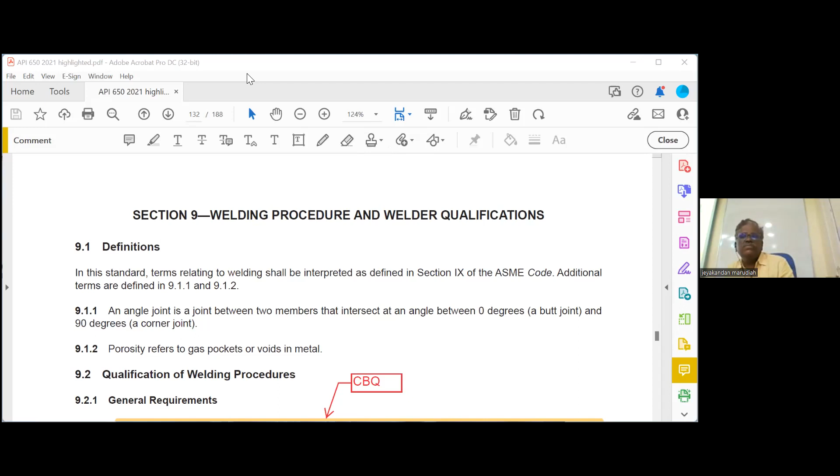The erection manufacturer and the fabrication manufacturer, if other than the erection manufacturer, shall prepare welding procedure specification and shall perform test documents by procedure qualification to support the specification as required by section 9 of the ASME code and any additional provisions of the standard. So if they ask an exam question, as per which standard do we qualify procedures: section 9 and 650. It is not only section 9, we have to follow any additional requirements of 650 also, because 650 has some additional requirements.

Now this one also important. Welding procedure for ladder and platform assemblies, handrails, stairways, and other miscellaneous assemblies, but not their attachment to the tank, shall comply with AWS D1.1, AWS D1.6, section 9 of the ASME, including the use of standard WPS. That is important. Suppose it is not attached with the tank, only the handrail, or we can have platforms which are not directly attached to the tank, you can use D1.1 or D1.6 also.

Now, in ASME section 9, there is a P number and a group number. What is the P number? It is a grouping of base metal, based on chemical composition, weldability, and mechanical properties. And the group number within the P number, for example P number 1, we have 3 group numbers: 1, 2, 3.

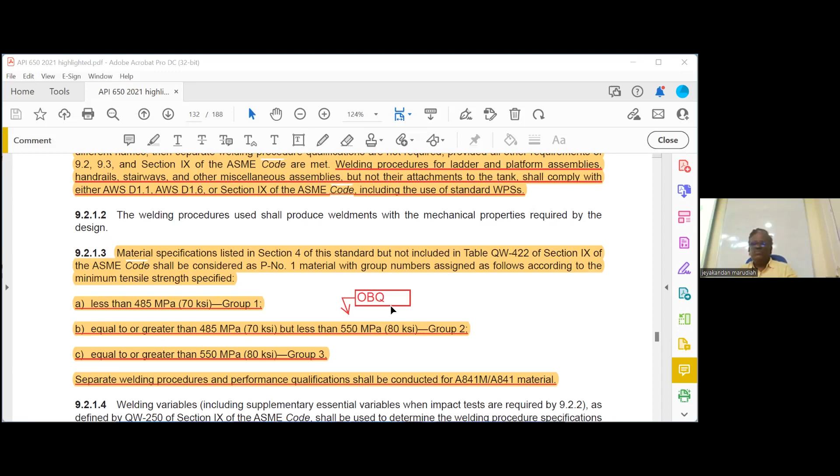This is important: material specification listed in section 4 of the standard but not included in table QW-422 of section 9 shall be considered P number 1. If it is here but not in section 9, take it as P number 1 because all are carbon steel, with the group number assigned as follows according to minimum tensile strength. Less than 70 KSI, we take it as group 1. Equal or greater than 70 KSI but less than 80, group 2 — that is an open book question. Equal or greater than 80 KSI, we take group 3.

And separate welding procedure and performance qualification shall be conducted for A841M, A841 material. Suppose you want to use A841, there is no P number group, we have to make a PQR only for that material. It is not allowed to do otherwise. Is it clear?

Now, sometimes what will happen?

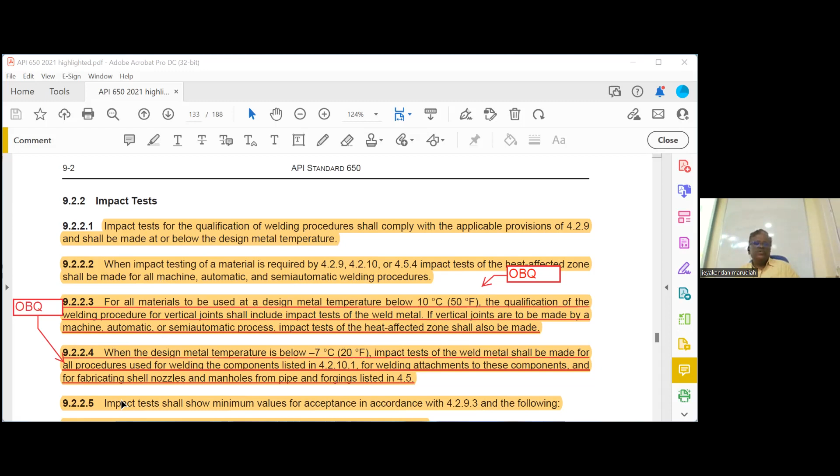The qualification of welding procedure for vertical joints shall include impact test of the weld metal. If vertical joints are made by automatic machine, impact test of the heat affected zone is also open book question. When the design metal temperature is below 20 degrees Fahrenheit, impact test of the weld metal shall be made for all procedures used in the welding. So if it is less than 20 degrees Fahrenheit design temperature, for all procedures, whether horizontal or vertical weld, we have to do impact test - this is only for procedure impact test.

Now what value do you have to use? Impact test shall show minimum values for acceptance in 4.2.9.3 and following. For P number group 1, we have to take for PQR this value of 15 foot-pounds average of 3. For P number 1 group 2, it's 20 foot-pounds. For P number group 3, it's 25 foot-pounds. We have to take this; we will not follow those other values. For procedure, we have to follow this PQR table.

For plates thicker than 40mm, 1.5 inch, this value shall be increased by 5 foot-pounds every half an inch - over interpolation, for interpolation averaging we can do. For example, if we take P1 group 1, what is the average required? 15 foot-pounds, but this is applicable only when thickness is 1.5 inch or less. Suppose your thickness is 2 inch, so every half an inch how much do you increase? 5. So 15 plus 5, that should give 20 foot-pounds value. That is the meaning of this.

From an exam point of view, this is not important. The exam never asks this, so leave it.

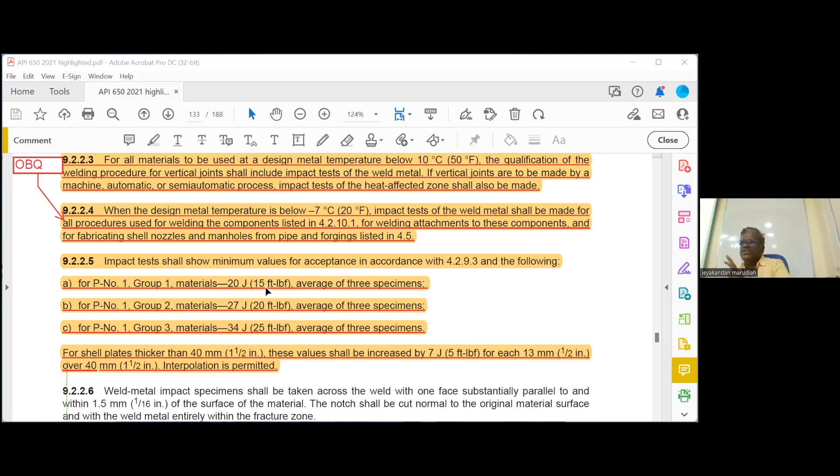Okay, highlight this one, 9.3A. Each welder or welding operator shall be assigned an identified number, letter, or symbol by the fabrication or erection manufacturer. That is important, so every welder should be given an identification number.

Now highlight B. The fabrication or erection manufacturer shall maintain a record of welders or welding operators employed that shows the date and results of the test for each welder and the identification mark assigned to each. The record shall be certified by the manufacturer and accessible to the inspector. So you have to maintain traceability of which joint is welded by which welder.

Then where do we write the welder number on the tank? On the tank, every 3 feet it should be hard stamped. Suppose hard stamping is not allowed due to some service condition, you can write it with paint also.

The welder or welding operator's identification mark shall be stamped either by hand or machine on all tanks. The mark shall be at intervals not more than 3 feet along the following welds, liquid containing, including all openings. So every 3 feet you have to stamp it. The 3 feet is a closed book question.

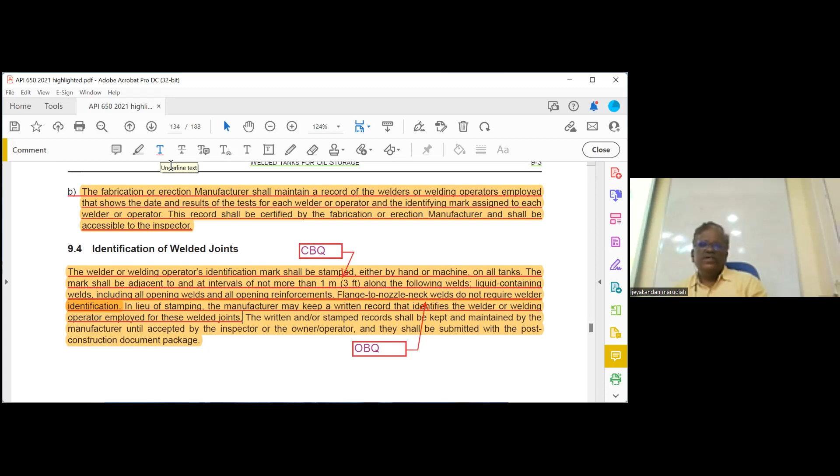Marking again may be one question only. So all storage tanks should have a nameplate. What are the details on the nameplate? What should be the letter size on the nameplate? Minimum 4 millimeter, minimum 5 by 32 inch, or 4 millimeter.

Now change it to 4. The nameplate shall include means of letters, number not less than 4 millimeter, 5 by 32 inch. That is a closed book question. So this is the nameplate information.

Then please go to the next page. Regarding PWHT, if the nameplate shows SR1, that means only flush type clean out fittings were post-weld heat treated. SR2, flush type clean out.

I told you group 1, more than 1 inch thickness or more than 12 inch nozzle, we have to do PWHT when the thickness is more than 1 inch. Group 4 to 6, more than 2 inch diameter nozzle, we have to do it. Highlight this one.

Use SR1 only for flush type clean out fittings and flush type shell connections that have had thermal stress relief. This is an open book question. SR2: when thermal stress relief has been performed on flush type clean out fittings, flush type shell connections, and shell openings NPS 12 and greater in size in shell plates, insert plates, or thickened insert plates.

SR3 is for group 4 to 6, NPS 2. SR4: all flush type clean out, all flush type connections, and the shell openings. SR5: complete tank, if you are doing the complete tank PWHT it is SR5. None means there is no PWHT on the tank.

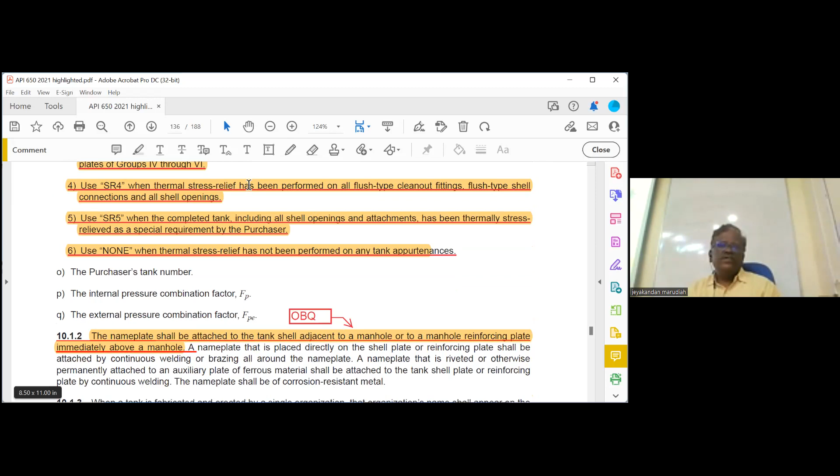Then certification. Who will certify the tank? He has to produce a certificate, the manufacturer. The manufacturer shall certify to the purchaser by a letter such as shown in figure 10.2 that the tank has been constructed in accordance with applicable requirements of the standard. So this is the certification letter he has to give, manufacturer certification letter. To the address: we hereby certify that the tank constructed for you at the location described, serial number, contract number, meets the application of 650 dash edition dash division. So manufacturer should certify. Okay.

So again, who will certify? The manufacturer shall certify to the purchaser by a letter such as shown in figure 10.2 that the tank has been constructed in terms of the applicable requirements.

That's all for chapter 10. Now we will go to Annexure A, optional design basis for small tanks. Annexure A may be one question. Again, Annexure A is revised now from the previous edition.

So when can you use Annexure A? If you are fabricating a storage tank as per 650, and if the purchaser or owner wants you to fabricate as per Annexure A, you can go for it. What are the conditions you have to follow when using Annexure A? Condition number 1, maximum shell plate thickness allowed is 1/2 inch. If you are fabricating as per main code, there is no limit, no thickness limit. What is the maximum shell thickness allowed as per the main code?

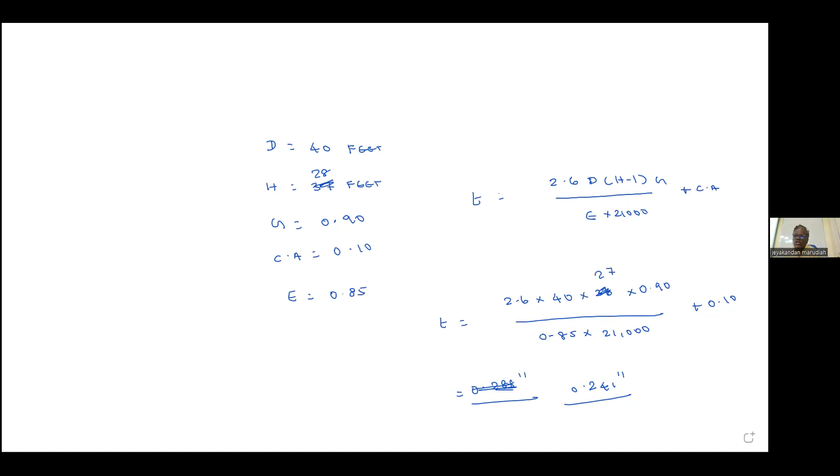We can find out what is the capacity of the tank. Capacity means, suppose I have a storage tank. For example, let us take diameter and fill height. What is the diameter? Just tell me. 40 feet, okay. So height, the design liquid level, 28 feet. Okay, same we will take, because 28 minus 1 we took as 27.

Now, how many barrels of oil can we fill in this tank? The capacity formula is 0.14 D squared H. This is the capacity for any tank. Just calculate it: 0.14 D squared H. I will show you, no problem. Just calculate it.

So what answer are you getting? Six thousand two hundred seventy two barrels. You can fill this tank with this. This is the capacity of this tank.

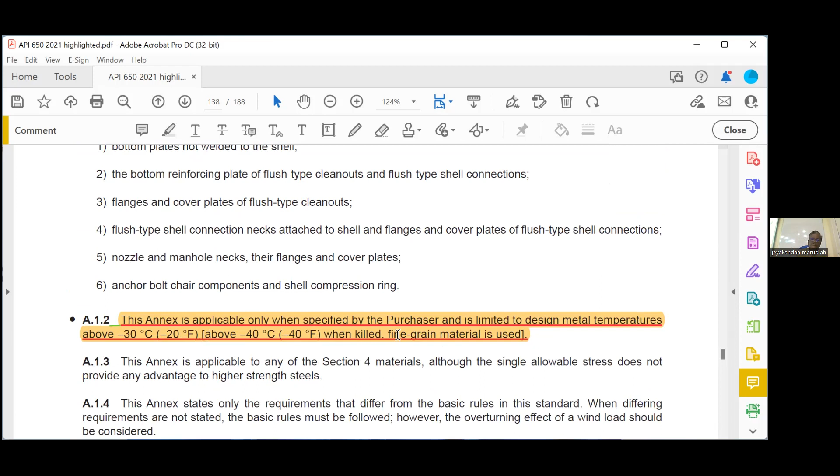Highlight A12. This annexure is applicable only when specified by the purchaser and is limited to design metal temperature above -20, and above -40 when killed fine grain material is used. Generally, above -20 only we have to use Annexure A, and if you are using fine grain practice, above -40 we can use it.

Please go to the next page. We will skip A1A and go to A1B. A1B, typical sizes, just mark it as open book.

Corresponding nominal capacities in barrels for tanks with 72 inch courses. So 72 inches means each shell course has 6 feet. If you are using Annexure A, it is allowed to use only the shell course height either 6 feet or 8 feet per each shell course.

Minimum number of shell courses: this is the tank height and the number of shell courses. Suppose one shell course is 6 feet, what will two shell courses be? 12 feet. 3 shell courses, 18. 4, 24. Just multiply by 6. 5, 30. 6, 36. 7, 42. Up to 10 courses you can go as per this Annexure A.

If you fabricate under Annexure A, you must use either 6 feet or 8 feet course height, that's the standard. If you are going for original code, there is no restriction, but for Annexure A, either the course height should be 6 feet or 8 feet. For 8 feet there is a separate table.

Now how to calculate the barrel? Suppose I have 6 shell courses, that means height will be 36, and my tank diameter is say 40. It will hold 8060 barrels, that is 8060 barrels. There is a formula here: C equals 0.14 d squared h. Using this formula only, the table was done.

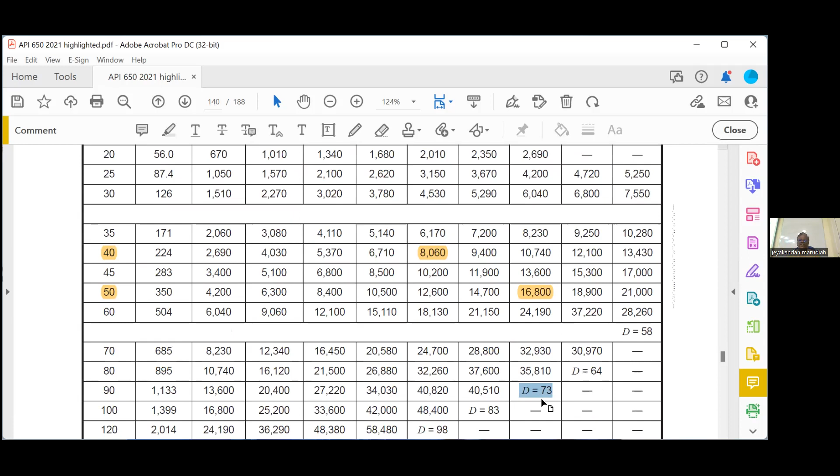These details are not important for the exam, Annexure A may have rarely one question. Height is based only on design liquid level, always design liquid level.

Then we'll go to the next one, A2B. This is the 96 inch, that means 8 feet shell course. 2 courses, 16. 3, 24. 4, 32. 5, 40, like this. The formula is the same here also: C equals 0.14 d squared h.

Then please go to A-6 design. The maximum tensile stress before the joint efficiency factor is applied is 21,000. That is important, a closed book question. If you are using Annexure A, you have to take the stress as 21,000.

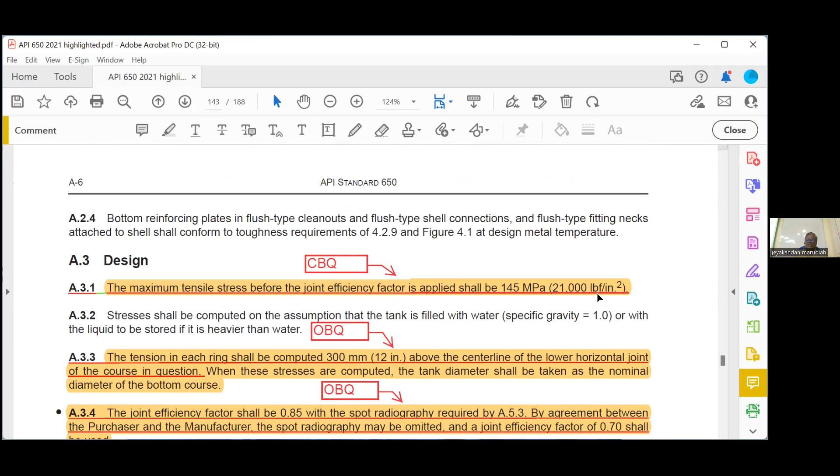Tension is calculated 12 inches above the center line of the lower horizontal joint of the course in question. This is the same 1 foot formula, that's why we use H-1. That is an open book question: 12 inches, 1 foot above the horizontal joint of each shell course we are taking.

Then highlight A34: the joint efficiency is 0.85 with spot radiography as required by A.5.3, or if spot radiography is omitted, the joint efficiency of 0.7 shall be used.

Yes, maybe one question. Yeah, annexure A, it will mention in annexure A.

That's all annexure A. Sir, now we will go to A3.3. How do you mention that it's the 1 foot formula? They are mentioning it as 1 foot, sir. See, the formula is given as H-1.

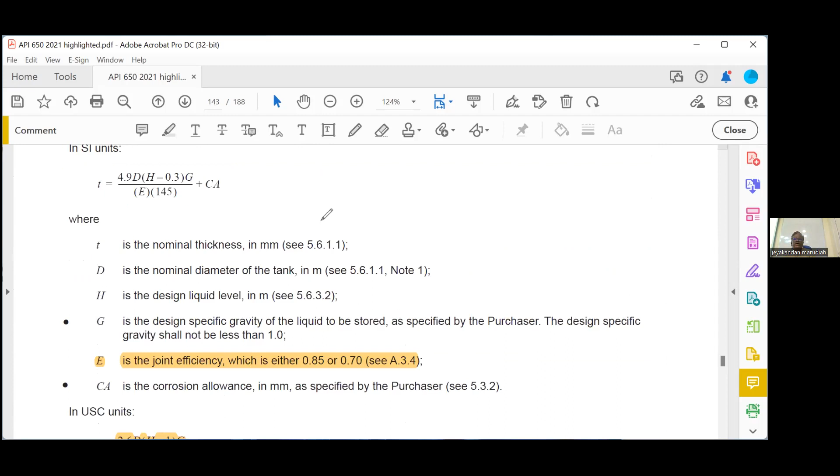Yes sir, you can see here why it is H-1. Any horizontal, for example, your tank height is say 28 feet design liquid level. When you are calculating the bottom course, we are taking 27 feet.

See what you are using in the formula is H-1. That is 27 feet, meaning we are taking from here to here, the design liquid level, 1 foot from the bottom joint only. That's why it is called the 1 foot formula.

If you take the second shell course, again 1 foot from this joint. Third shell course, 1 foot from the joint. Everywhere H-1 means it is a 1 foot formula - height minus 1 foot. That is the 1 foot formula.

Okay sir, okay sir, okay. Thanks.

Now we will go to annexure B, recommendation of design and construction foundation of above ground oil storage tanks.

It's not very important, just one line. Highlight B3.3, B-3.

See, annexure B, I think some pages are missing in the printout, but if we correct it, we will give you the soft copy. We'll include it in the soft copy because there was some editing mistake, but there is no question on the missing pages. Okay, but we will give you the soft copy, corrected.

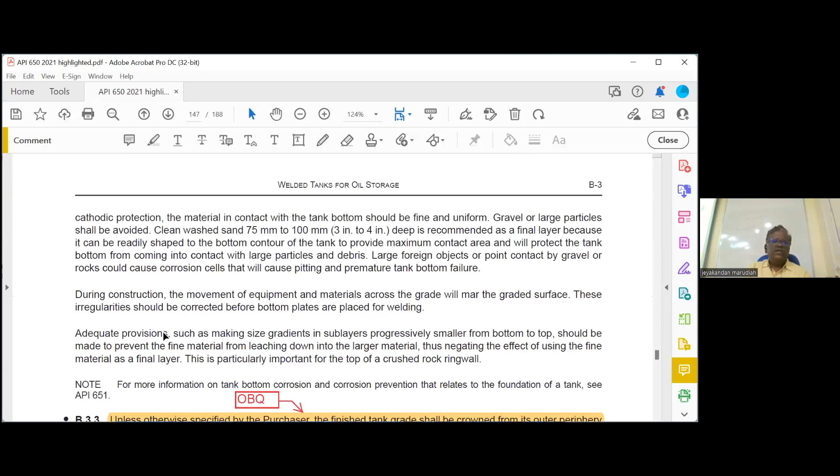Then highlight this one: unless otherwise specified by the purchaser, the finished tank grade shall be crowned from its outer periphery to its center at a slope of 1 inch in 10 feet.

Okay, tank grade means tank level slope, because we have seen the bottom plate slope is 1:120. For that you have to make a grade also. Grade means the concrete - if you are using concrete or soil, that should be in slope.

See B1.1, about this recommendation of design and foundation - we talk about the foundation. Okay, there is a printing mistake, some 2 pages missing, but we will include it in the soft copy and give it to you.

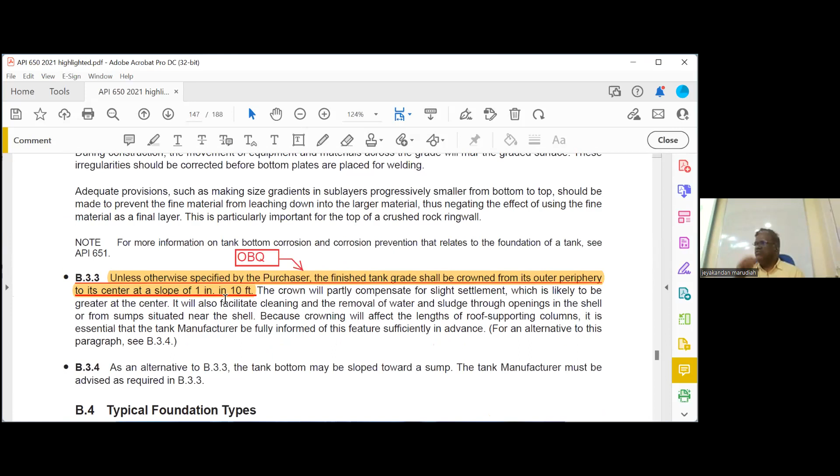So this is what should be highlighted - what should be the slope if they ask in open book. Unless otherwise specified, the finished tank grade shall be crowned 1 inch in every 10 feet slope. You have to maintain a foundation slope - this is a foundation slope, and there we have seen the bottom plate slope.

Then what are the foundation types? Earth foundation without ring wall - a satisfactory earth foundation should accomplish the following: provide a stable plane to support the tank. What is the purpose of the earth foundation? Without a ring wall, this should be the condition of the foundation.

Limit overall settlement of the tank to a value compatible with the allowance. Provide adequate drainage and not settle excessively at the perimeter - it should not settle excessively. Just highlight it, maybe open book.

Then earth foundation with a concrete ring wall, B4.2. Highlight this one also: large tanks and tanks with heavy or tall shells that are self-supported roof impose a substantial load on the foundation under the shell.

Okay, so when you have a self-supported roof, the total roof weight will be on the shell, because the shell will have what you call girders. There are no columns - self-supported means there is no column. The entire roof weight will be on the girders and the shell will hold the load.

This is particularly important with regard to shell distortion in floating roofs. When there is some doubt whether the foundation would be able to carry the shell load directly, a concrete ring wall foundation should be used. For self-supporting roofs, you have to use a concrete ring wall because soil will not withstand that much load.

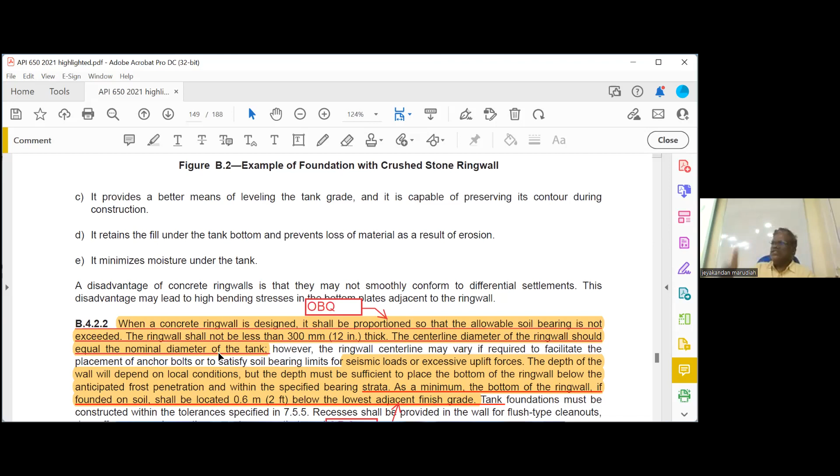Should be at least 1 foot, 12 inch, 1 foot thickness. The center line diameter of the ring wall should be equal to the nominal diameter of the tank. Generally the shell should sit at the center of the ring wall.

Then seismic loads - highlight this one: as a minimum, the bottom of the ring wall, if founded on soil, shall be located 2 feet below the lowest adjacent finished grade. Okay, 2 feet below the adjacent grade for the bottom of the ring wall.

Highlight this one, open book. Wherever we mark it, we covered it in your question bank. That's why we mark it. That's all.

No, we have 2 more. Annexure C is very important, and H is important. Generally there are two questions in Annexure C, two questions in Annexure H. Annexure C is external floating roof, Annexure H is internal floating roof. For floating roof, there will be at least 3 to 4 questions.

Please remember, if they ask any question regarding floating roof construction, you have to refer only to Annexure C. Generally these will be open book questions. Don't try to search in the main code. The main code doesn't discuss anything about external floating roof, we generally discuss about common roof. Any question asked about floating roof, at least one question will be there in the exam. You have to search in the annexure.

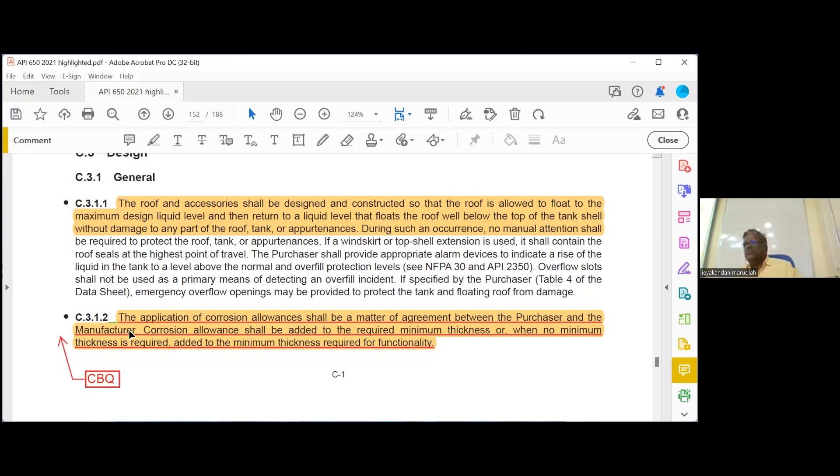Next, what should be the thickness? Sleeve and fittings on the single deck, annular pontoons and lower deck shall have a minimum thickness of 6mm for all pipe and plate construction. So the fittings should have minimum 6mm thickness - that is an open book question. Generally what is the thickness of the roof? 5mm, that is applicable to floating roof also. Roof will be 5mm, but all fittings should have minimum 6mm.

Then shunt - what is the purpose of shunt? Shunt is a conductor, an electrical conductor.

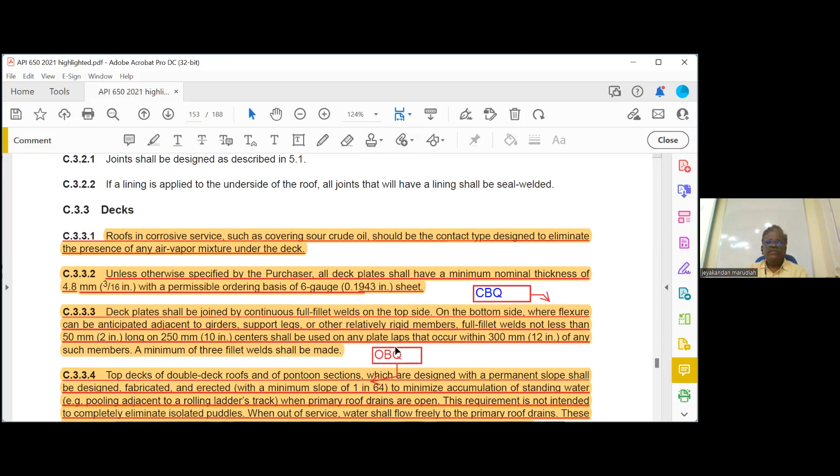So if you take the plates, one side will be a continuous fillet weld, the top side. The bottom side will have a stitch welding, not a continuous weld. What is the stitch welding? It will be a 2 inch long weld for every 10 inch - just a 2 inch stitch we have to weld. This is for the floating roof.

Then what should be the slope of the external floating roof? 1 inch in 64. So I told you, for floating roof, we have to take the radius and make a slope. Highlight this one: top decks and double deck roofs of pontoon type which are designed with a permanent slope shall be designed and fabricated with a minimum slope of 1 inch in 64 to minimize accumulation of standing water when primary roof drains are open. This requirement is not intended to completely eliminate isolated puddles. Okay, that is important.

Then pontoon design. Now suppose, see how a floating roof will be there. Okay, so this is the external floating roof.

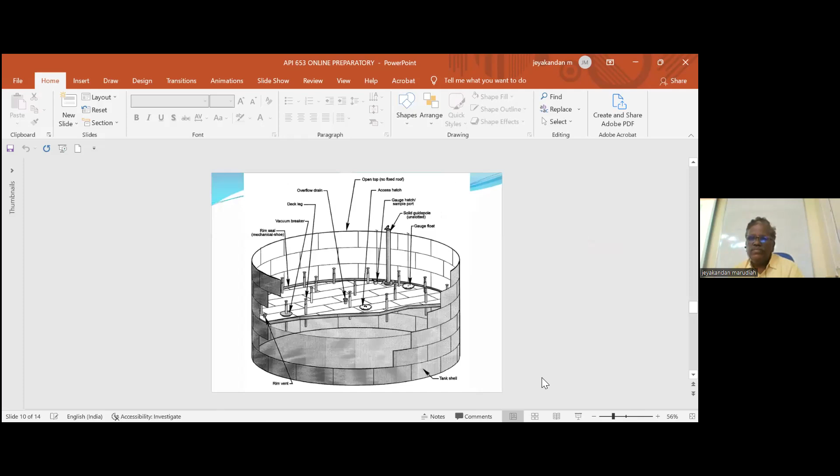Then this is called a pontoon - pontoon of the box type. This is a single type, you can see only one plate, that also will have the roof drain. Now suppose the roof drain is not operating.

This is the internal floating roof. Internal floating roof - we have a fixed roof and there is a floating roof piece. Internal floating roof, there will be a fixed roof and a floating roof. And this is how the drain is working. This is the seal, the actual seal. So I told you the top one is called the secondary seal, the bottom one is called the primary seal.

Okay, now what is the requirement? Suppose the drain is not operating, the drain is plugged, the drain is blocked. Then what will happen? The rain will collect on the roof. So what does the code say - how much load should the roof withstand without sinking? So this is the requirement.

A 10 inch rainfall - rainfall is measured today in centimeters, so they will tell it in inches or centimeters. A 10 inch rainfall in a 24-hour period over a full horizontal tank with the roof intact. Even if there is a 10 inch rainfall for a continuous 24 hours, the roof should not sink - it should withstand that much weight of water. That is the design condition.

So highlight this one, open book question: this condition does not apply to double deck roofs provided with emergency drains designed to keep water to a lesser volume that the roof will safely support.

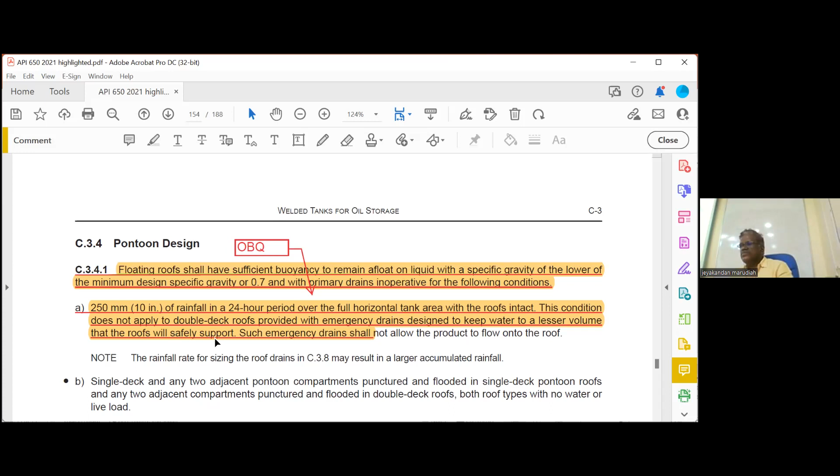Then pontoon openings. Each compartment shall provide a liquid tight manhole with a minimum size of NPS 20. On the pontoon compartment box circle, we should have a manhole, and the main roof also we should have a manhole. So the pontoon compartment manhole should be minimum NPS 20. That is an open book question.

Then please go to the next page, ladders. Generally the roof will have rolling ladders, flexible ladders. Now how much should the rolling ladder withstand? At the midpoint, it should withstand at least 1,000-pound force or 4,450 Newton.

So highlight this one. The ladder shall be designed for full roof travel, regardless of the normal setting of the roof leg supports. The ladder shall have full length handrails on both sides, and it shall be designed for 1,000-pound force midpoint load with the ladder in any operating position. That line is open book. It should withstand 1,000-pound force midpoint load in any operating position. That is an open book question.

Now highlight this one, primary roof drains. What should be the size of the roof drains? Highlight the first, second, third, fourth, fifth line. A swing type check valve shall be provided at the inlet of the drains of single deck roofs to prevent backflow of stored product if leakage occurs.

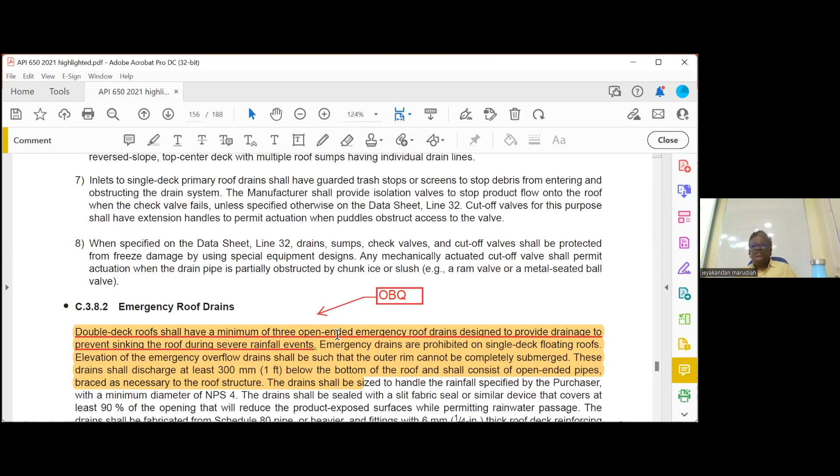Now primary seal, highlight this one. Section 13.13.5: The type of primary seal may be controlled by jurisdiction regulation. Types generally used are mechanical shoe seals and liquid mounted seals. So primary seal is the bottom one, generally mechanical shoe type seals.

Secondary seal: the type of secondary seal may be controlled by jurisdiction. If required by the purchaser, a secondary seal shall be provided by the roof manufacturer as specified.

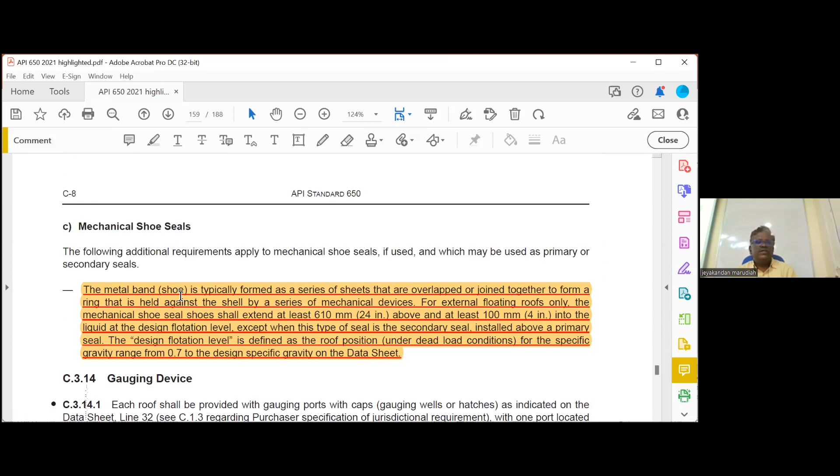Then mechanical shoe seals. What is a mechanical shoe? Highlight this one. The metal band is typically formed as a series of sheets that are overlapped or joined together to form a ring held against the shell by a series of mechanical devices. For external floating roofs only, the mechanical shoe seal shoes shall extend 24 inch above and at least 4 inch into the liquid. That is not important.

I think that's all. Do we need to mark the mechanical shoe seal or not, sir? No need.

Go to C10. This is important, last one, C4.5. Drain pipe and hose systems of primary drain shall be tested with water at a pressure of 50 pounds per square inch gauge, so let us check whether the drain line has any leakage. During the flotation test, the roof drain valves shall be kept open and observed for leakage of the tank contents into the drain lines.

So any leakage in the pipe, we have to check the drain lines. What happens if the drain line is leaking? There are two possibilities: one is oil can mix with water, or even water can mix with oil. Both possibilities are there. That's all annexure C.

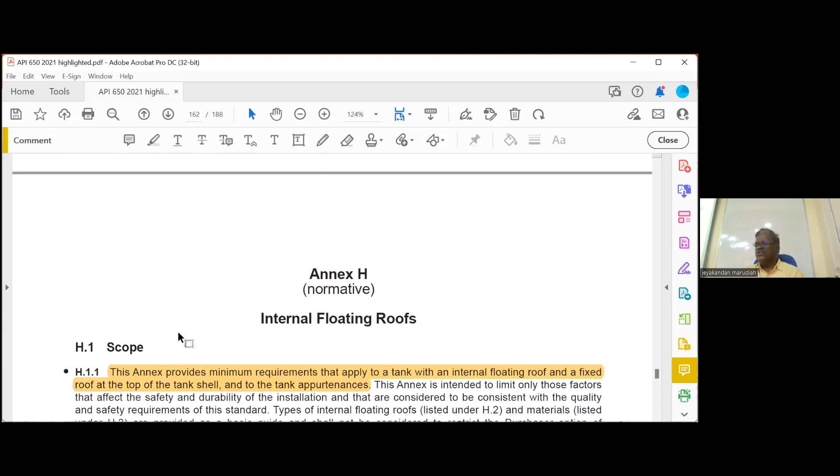Then we'll go to annexure H, internal floating roof. Generally external floating roof is important, generally 2 questions are asked. Here maybe 1 question, very rarely. Highlight this H21: The internal floating roof type shall be selected by the purchaser in consideration of both the proposed and future product service, operating condition, maintenance requirements, regulatory compliance, all these things.

Next, page number H2, H3.2: steel, same thickness only. Steel shall conform to the requirements, then we should have 3/16 inches minimum thickness.

Now, when you are using the internal floating roof, the fixed roof can be made of aluminum sheet also. That is allowed, fixed roof you can use aluminum also. Okay, highlight all types.

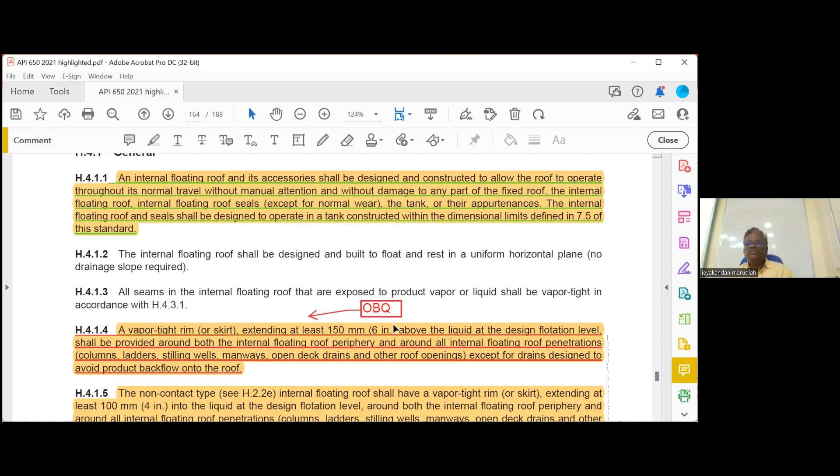H414: A vapor tight rim or skirt extending at least 6 inches above the liquid at the design flotation level shall be provided around both the internal floating roof periphery and the internal floating roof penetrations, except for drains designed for. So you should have a vapor tight rim. What is the seal? Vapor tight rim should be at least 6 inches above the liquid level. It should be there. Open book question.

Then this is important. Page number H421: All internal floating roof design calculations shall be based on the lower of the minimum design specific gravity or 0.7, regardless of any higher specific gravity specified by the purchaser. When you are calculating thickness, you have to use 0.7. Suppose your stored product specific gravity is less than 0.7, you have to take the value. Maximum allowed is 0.7.

Then this is important, page number H5, last paragraph. Only austenitic stainless steel hardware shall be used to join aluminum and stainless steel components to each other or to carbon steel. That is important. When you are joining aluminum to carbon steel, we have to use a bolt/nut made up of stainless steel. Where acceptable to the purchaser and manufacturer, aluminum hardware may be used to join aluminum components. Aluminum shall be isolated from carbon steel by an austenitic stainless steel spacer, elastomeric pad, or equivalent protection. The use of plated fasteners shall be permitted only when components allow. Generally, when joining aluminum to steel, we have to use stainless steel. That is an important point.

Then peripheral seals, page number H. This is highlighted, almost same as before. H441: When an internal floating roof has two such devices, one mounted above the other, the lower is the primary peripheral seal and the upper is the secondary peripheral seal. Where there is only one such device, it is a primary seal, regardless of position. When you have two seals, upper one is called secondary, lower one is primary. When you have only one, that is primary.

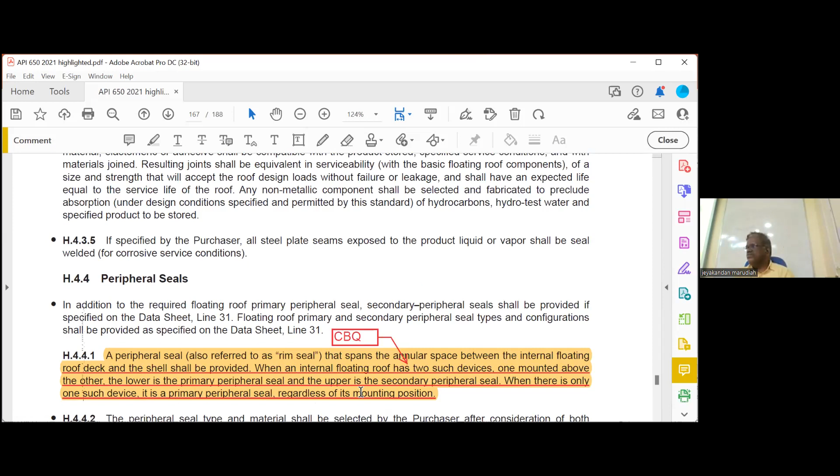Then what type of seal material do we have to use? This is open book question. For crude oil, the seal material should be made up of this material, sealing. And all peripheral seals and their attachment to the floating roof shall be designed to accommodate plus or minus 4-inch local deviation between the floating roof and the seal. That is open book.

Even if you do not understand, no problem. Just read the question and answer.

Then this is very important, recently asked in the question. All fasteners and washers for insulation of seal joints, including fabric, shall be austenitic stainless steel. That is important. When you are using seal joints, you have to use only austenitic stainless steel. Fasteners means bolt, nut, washer—you have to use austenitic stainless.

Then penetration, H45: columns, ladders, and other rigid vertical appurtenances that penetrate the deck shall be provided with a seal that will permit a local deviation of plus or minus 5 inches. That is open book question.

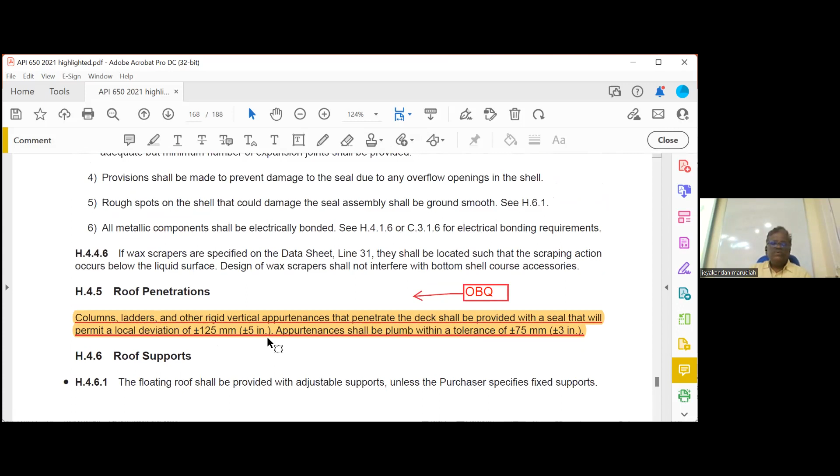Highlight this one, tank circulation vents, page number H10. Peripheral circulation vents shall be located on the tank roof and meet the requirement 553, so they are above the seal. And for internal floating roof, the maximum spacing between vents shall be 32 feet.

So suppose you have a bench, every 32 feet you should have a bench. Yesterday also we have seen one 32 feet. What was that 32 feet yesterday? Settlement, every maximum 32 feet.

Then manhole, page number H-11: At least one fixed manhole complying with the standard, with a nominal opening of 24 inches or larger, shall be provided in the fixed roof for maintenance ventilation purposes. If used for access to the tank interior, the minimum clear opening shall be 30 inches. Suppose you want to go inside, then you should have a 30 inch opening.

That's all. Then H, Annexure I—these are not important.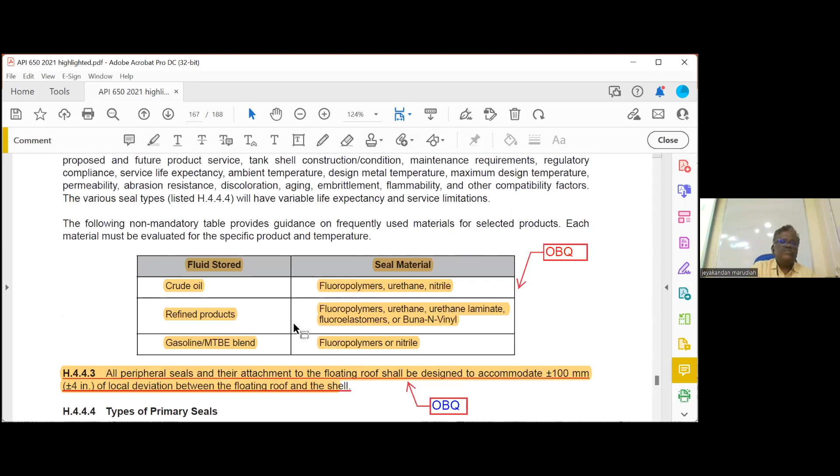Only one paragraph is important.

So I-2. The permeability of leak detection barrier shall not exceed 1 into 10 to the power minus 7 cm per second. Just to highlight this one. I2, page number I2, D, point number D. Highlight this one, mark it as open book. Leak detection barrier.

See, what is leak detection barrier? You can see the sketch here. Suppose this is our tank bottom, this is our sandbag. They will insert some pipes here. Even concrete, they will have some pipe. Purpose is, if the bottom is leaking, the leakage should be immediately collected outside.

There are two reasons. One, you should know immediately that the bottom is leaking. When the leakage comes outside only, you should know. But if it is inside here, it will spread. It will damage the foundation. It will damage the bottom also. So that is called a release prevention barrier, RPB.

Next to 653, we will discuss about the RPB. Release prevention barrier means it should channel. Channel means it should bring back immediately to the outside. Any leakage in the tank leaking, the inspector should know it immediately there is a leakage. It should come outside. How it will come outside? You should have pipes everywhere.

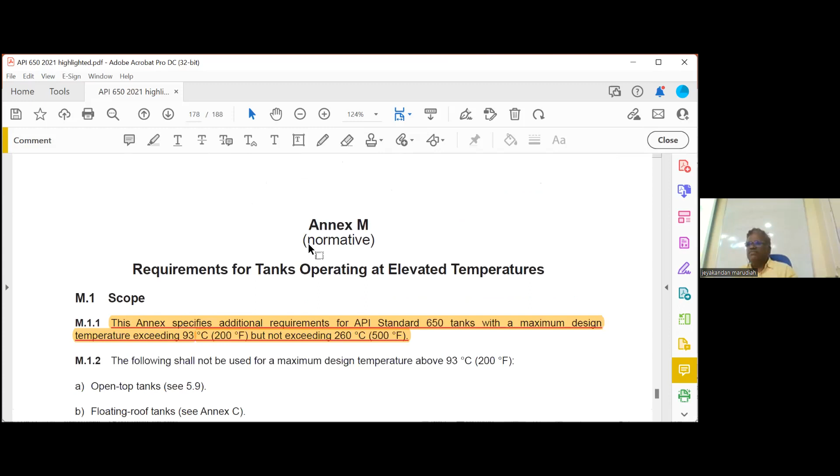Now we'll go to annexure M. Please go to annexure M. It is there in your book. M is there. The first line only is important. We already know that annexure specifies 650 and 200 to 500 degree Fahrenheit. That is closed book also, because we marked there, we didn't mark there. Then these are not important.

Highlight this one. Investigation criteria. Reflectors that produce a response greater than 20% of the reference level shall be investigated. Alternatively, for a method or technique that does not require amplitude recording, signals longer than 40% of the acceptable length shall be investigated. What is the meaning of this?

When you have a UT screen, for example, this is your UT screen. I'm talking about A scan. Sometimes you will find a line like this. What is this called? DAC, distance amplitude correction curve. Then the system will automatically draw a 50% DAC and automatically draw a 20% DAC also.

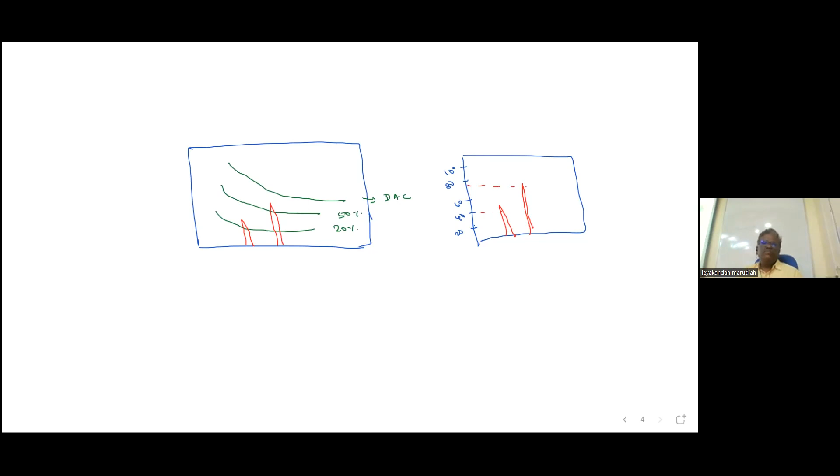Sometimes you can accept it because it is slag, and slag has some acceptable length. When you are accepting something crossing greater than 50%, or here crossing 75%, you should record it and mention it in the report. There is a signal crossing 50% DAC, but it is accepted because of the size, the length is less. So these two points are important. Highlight this one, that is the first point we already noted.

Reflector that produces a response greater than 20% of the reference level shall be investigated. Alternatively, for methods or techniques that do not use amplitude recording, reflector longer than 40% shall be investigated.

That is an open book question.

Okay, so we will start 653, tank inspection, repair, alteration and reconstruction. The most important code, 653.

Right, so we have to go one by one, chapter by chapter. First one, what is meant by inspection?

Okay, online, can you hear the voice? No issue, right? Hello? Yeah, we can. Okay, okay, no problem.

Now, first, tank inspection. So what are the different types of in-service inspection we have? First one, roof inspection. I will just take an introduction for 10 minutes, then we will go through the code. Shell inspection and bottom inspection. So there are three major types of inspection.

Now, remember I said the rule in new construction: the bottom should be minimum 6 mm, shell should be minimum 5 mm, roof should be minimum 5 mm. In 653 for in-service, it is almost 50% of that. Bottom should be minimum 2.5 mm.

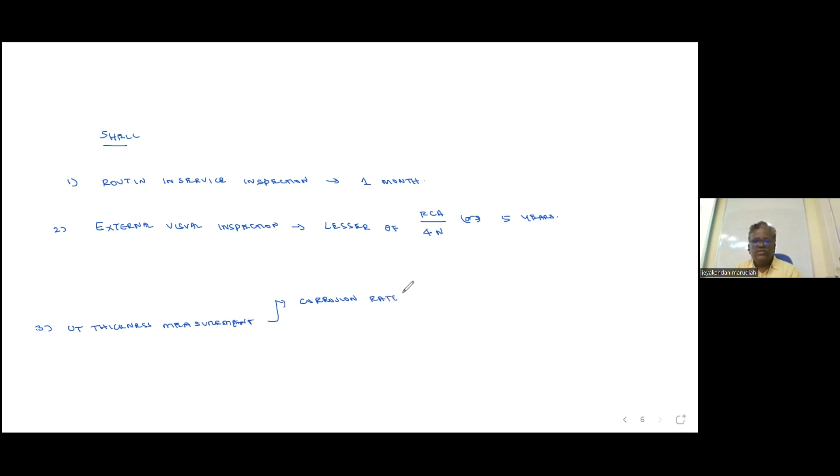If corrosion rate is unknown, you don't know what is the corrosion rate, then the rule is we have to take 5 years measurement.

Then second, if corrosion rate is known, lesser of RCA by 2n or 15

years. So please write and calculate what is the external visual inspection for this tank you have written, and what is the UT thickness measurement, because corrosion rate we already know. Corrosion rate we have calculated it.

So just write this, what is the routine in-service? There is a fixed one month, every month you have to do it. What is the external visual inspection period? RCA by 4n or 5 years, whichever is less. We already calculated RCA, we already calculated N. Calculate it, what is RCA by 4n?

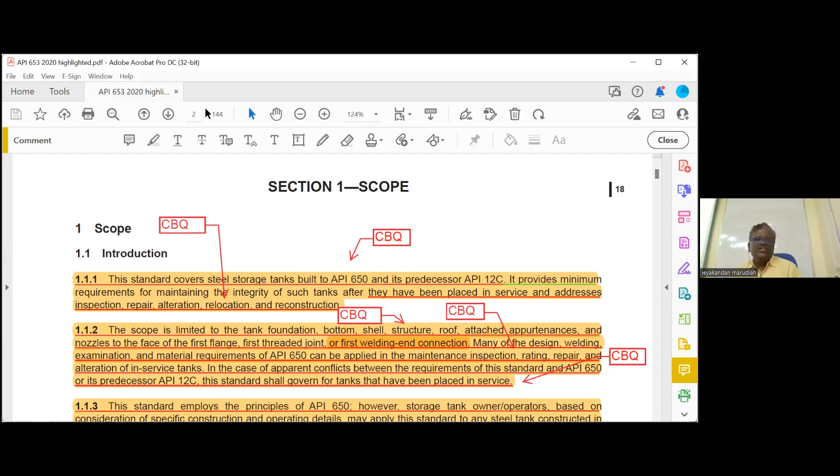I'm just telling you this because when you are preparing for the exam, there are so many areas involved. Now, 650 comes into the picture.

If we take 650, the first edition was issued in 1961 only. Before 1961, it was API 12C, welded storage tanks. So before that, storage tanks were constructed as per API 12C. In 1961, the first edition of 650 came out. Up to 1958 it was API 12C. Suppose you have a tank constructed as per API 12C, you can still use 653. 653 can be used for tanks constructed as per 650, and also as per 12C.

So then you get confused, that's why I'm showing this, and this Annex A is given. When the editions come: the first edition of API 12C was 1936, long before our independence. 1936, July 19th. So up to 1958 it was API 12C, then from 1961 it became API 650.

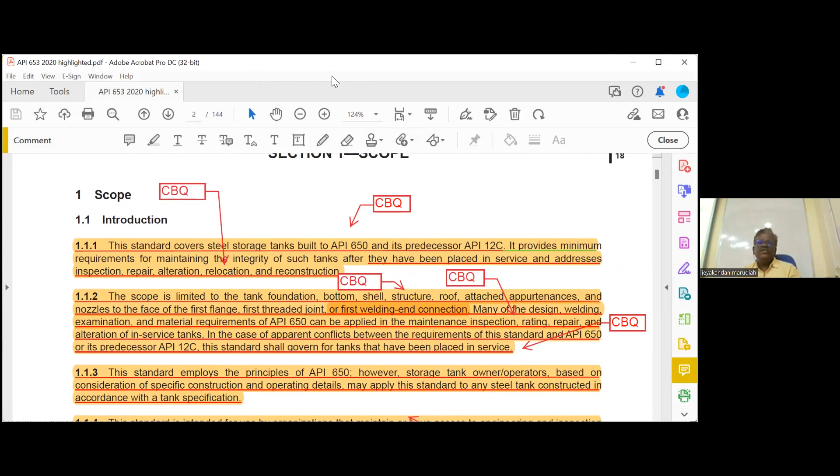So, what is the scope of 653? It covers tanks built by 650 and 12C. Then it provides the minimum requirements for maintaining the integrity of tanks after they have been placed in service. Only once they started service does 653 come into the picture. Before service, it will be 650 only.

It addresses inspection, repair, alteration, relocation, and reconstruction. So here they cover relocation also, even though the title doesn't cover it. That is important. Now what is the scope of 653? It covers from the foundation, bottom, shell, roof, attached appurtenances. Appurtenance means the level gauges, everything it will cover. The scope is limited to the foundation, bottom, shell, structure, roof, attached appurtenances, and nozzles up to the face of the first flange, first threaded joint, and first welding-end connection.

Next slide is also important: many of the design, welding, examination, and material requirements of API 650 can be applied in the maintenance, inspection, rating, repair, and alteration of in-service tanks. So you have to follow 650 requirements. Now suppose there is a conflict between 650 and 653, where your 650 is telling something different. For example, I will give you the conflict: what is peaking and banding allowed as per 650?

Peaking is the deformation of the vertical joint, and banding is the deformation of the horizontal joint. Both are half an inch. Peaking also half an inch, banding also half an inch. As per 653, peaking half an inch, banding 1 inch is allowed. Now, which one we will follow?

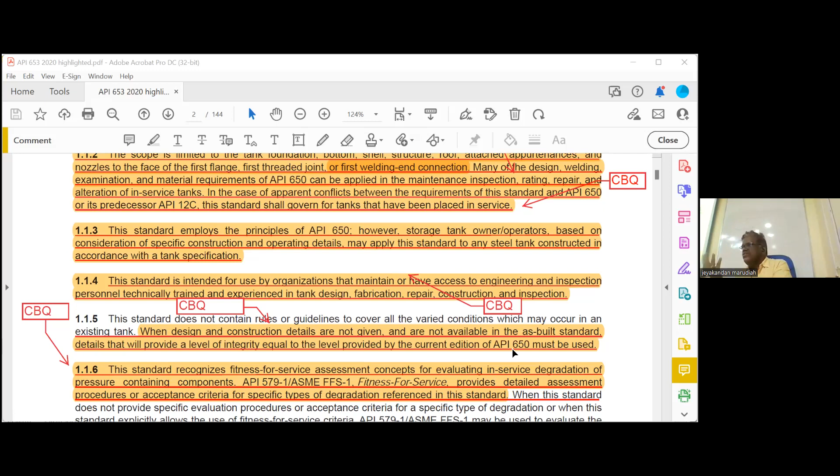Now, the standard recognizes the fitness for service assessment. So what is meant by fitness for service assessment? Okay, now if you take, for example, 650, say SA 516 grade 70,

SA 516, I will take this, just understand this. SA 516 grade 70 tank material. What is the tensile strength of the material? Tensile strength is equal to 70,000 psi.

Where can you find the tensile strength? The 650 table is there, just see the stress table. Grade 70 means 70,000, but what is the stress we are using for calculation in 650? That's why I asked you to refer to the 650 table. What is the SD we are using? As per 650.

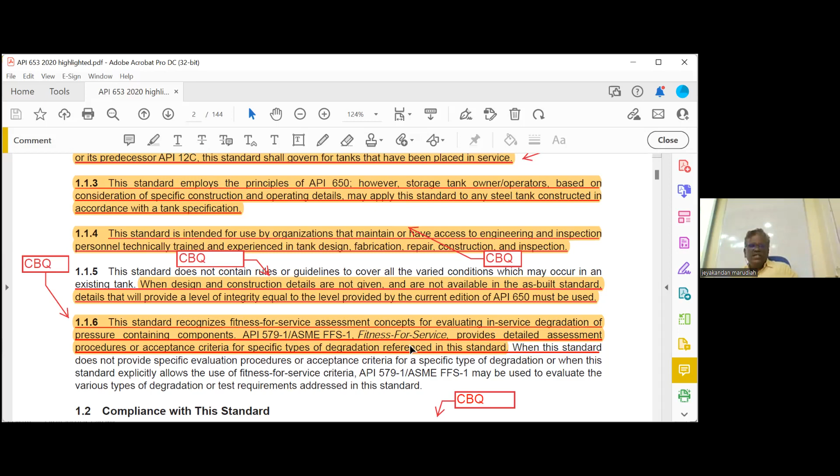Okay, highlight this one. This standard recognizes fitness for service assessment concepts for evaluating in-service degradation of pressure containing components. API 579 fitness for service provides the detailed assessment procedure and acceptance criteria for specific types of degradation. So for each type of degradation - lamination, corrosion, pitting, crack - we have separate chapters in 579, but 653 accepts the fitness for service.

See, we have two options. If you find some crack or reduction in thickness, either you can go for repair, or you can go for fitness for service. Without repairing also we can run it. But somebody should give a guarantee that it will not fail. Who will give the guarantee? 579. Okay, compliance - who is responsible for compliance with 653 is the owner operator.

The owner operator has the ultimate responsibility for complying with the provisions of the standard. The application of the standard is restricted to organizations that employ or have access to an authorized inspection agency, but all inspection will be carried out by the authorized inspection agency. Please remember, who is responsible for implementing 650? Manufacturer - there it is not the owner operator. For tank construction, the responsibility under 650 is the manufacturer, but here it is the responsibility of the owner operator. But the owner operator will not directly do all things, so it will be done through the authorized inspection agency for 653. Who is the authorized inspection agency? They are responsible for the inspection.

If there is a conflict between 650 and 653, you follow 653. If there is a conflict between 653 and local government rules, you follow the local government rules - you cannot violate local jurisdiction. But 653 is more stringent, meaning more strict, so you can satisfy both by following 653. Very important: if any provision of the standard presents a direct or implied conflict with any statutory regulation, the regulation shall govern. However, if the requirements of the standard are more stringent than the regulation, the requirements of the standard shall govern.

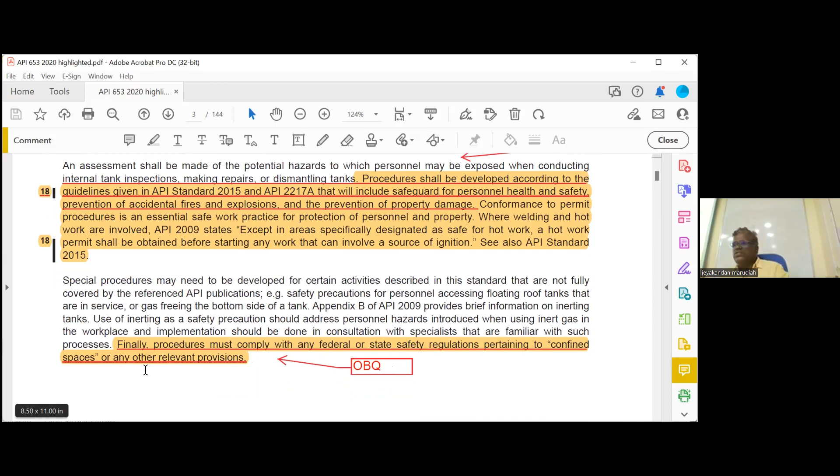So that is the end of chapter 1. Before going to the next chapter, we will complete the questions also simultaneously. Hope you can answer it.

Which of the following types of tanks does API 653 cover? Answer is 650 and 12C.

API 653 provides the requirement for protection of above ground petroleum storage tanks.

API 653 provides for all but of the following with regard to its above ground storage - which one it is not covering? Operation. It covers repair, relocation, and alteration.

The scope of API 653 is limited to all of the following except tank mixing motor. It covers tank bottom, tank roof, and foundation.

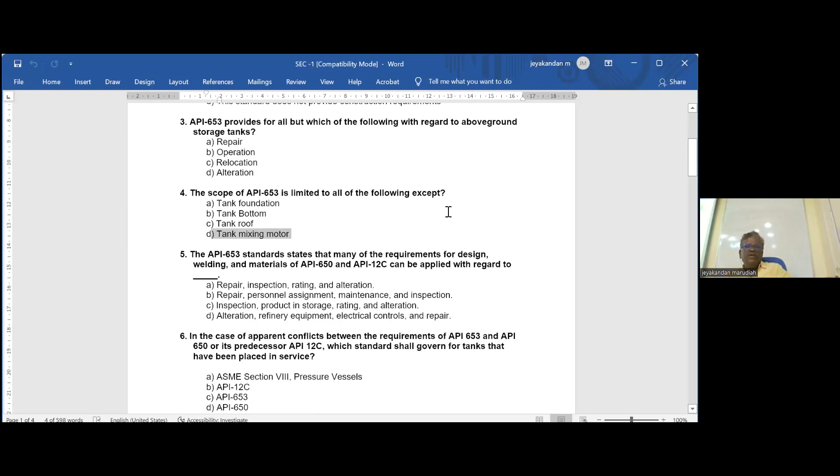The API 653 standard states that many of the requirements for design, welding, and materials to API 12C can be applied. Answer is repair, inspection, rating, and alteration.

In the case of apparent conflicts between the requirements of API 653 and API 650 or its predecessor API 12C standards, which one will cover? 653 only - we have to follow that.

Which of the following standards can be used for evaluating in-service fitness for service? Answer is API 579.

The use of API 653 is intended for organizations that have personnel who are technically trained and experienced in each of the following. Answer is design, fabrication, repair, construction, and inspection.

Design and construction details are not available in the... to provide a level of integrity equal to the current use, what standard do we use? We can use 650. If it is not given, we can use 650.

Ultimate responsibility for compliance with the standard is the owner-operator.

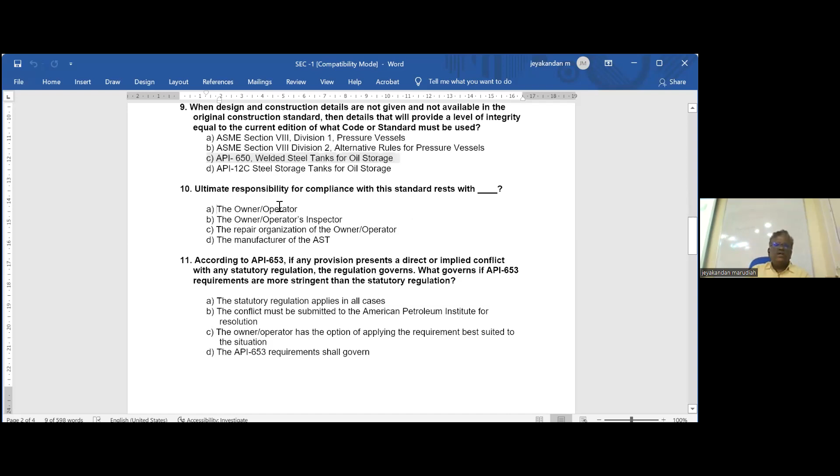According to API 653, many provisions - what governs with API 653? 653 governs. So if 653 is more stringent, meaning stricter, then we have to follow 653 because you automatically satisfy the local jurisdiction.

Safe working practices will comply with what requirements? Save this one - federal or state. This question is very important, recently asked in the exam. For confined space, you have to follow local, federal, and state regulations.

That's all of chapter 1. Now we will go to chapter 2.

Chapter 2, normative references - some standard numbers you should know. Very rarely one question will be asked on these. For example, what is API 579? Fitness for service - highlight this one, but they are not very important. 580 is RBI, risk-based inspection. This was asked in one of the exams.

What is 2015? Requirements for safe entry and cleaning of petroleum storage tanks. 2201 is hot tapping - this is important, there is a separate chapter on this. Hot tapping is installing a nozzle while the tank is in service. 2207 is preparing tank bottoms for hot work. 2217A is guidelines for safe work in inert confined space. Confined space entry is 2217A.

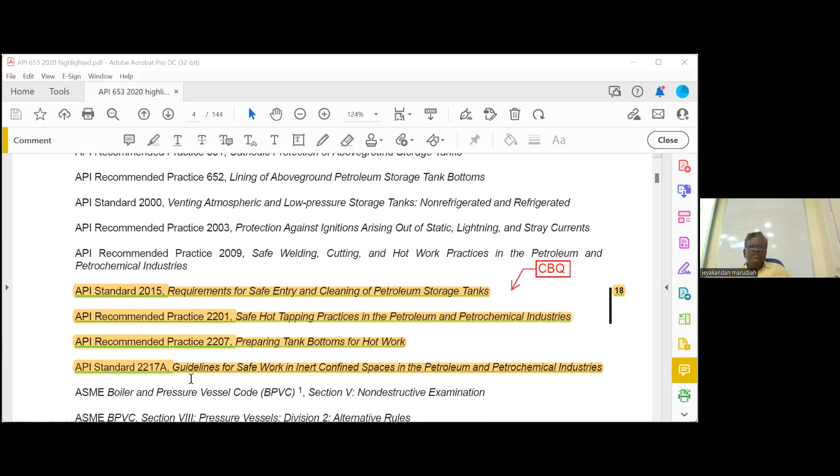SNT-TC-1A everybody knows - personnel qualification and certification in NDT.

So that's all. These are not very important, very rarely asked.

Now we'll go to chapter 3, terms and definitions. Again, there will be around 4 questions in chapter 3.

First, what is alteration? The definition of alteration is any work on a tank that changes the physical dimension or configuration. As I told you in the introduction, this includes increasing or reducing the tank height or shell height, or installing a new bottom. Then there are 2 standards: one is called the as-built standard, and the other is the current applicable standard.

What is the difference between as-built standard and current applicable standard? What is meant by as-built? As per which standard the tank was constructed, that is as-built. What is the current applicable standard? Which construction standard you are going to use now? For example, as-built standard may be API 650 year 2000 revision. Current applicable standard may be API 650, latest 2020 revision, like that. It can be same if the tank is constructed now only.

Suppose you don't know which code the tank was constructed to. Then what does the code say? If you know the year of construction, take that year's edition as the as-built standard. If you don't know whether it was constructed as per 650 or not, but you know the tank was constructed in 1990, take the 1990 edition as the as-built standard. Suppose you don't know which year the tank was constructed either, take the latest edition as the as-built standard, because we don't have any other option.

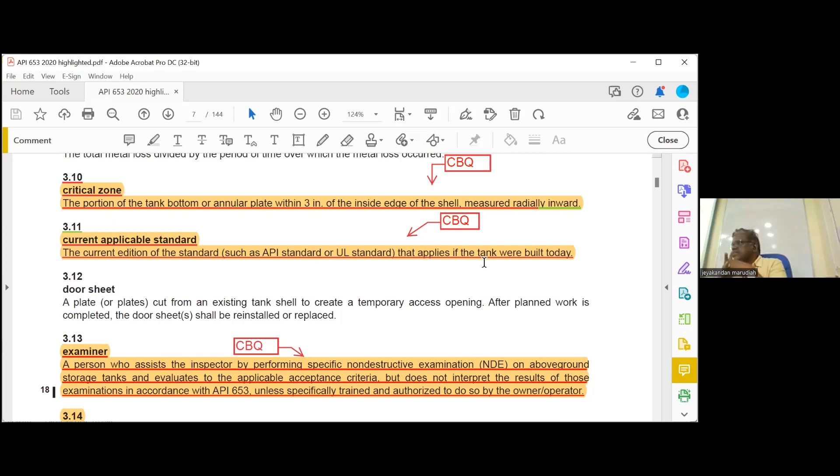UL - the Underwriters use the UL standard. It's still there; American standards are used.

Now, authorized inspection agency. I told you implementing 653 is the responsibility of the owner operator, but he cannot do everything directly. He will appoint the authorized inspection agency. Who is the authorized inspection agency? They are responsible for all inspection activities. First thing: who can be the authorized inspection agency?

First, the owner can have their own inspection department - the inspection organization of the owner user, owner operator. Please remember, it can only be the inspection department of the owner operator. It cannot be operation, maintenance, or fabrication - they cannot work as the authorized inspection agency. Only inspection people can work as the authorized inspection agency. So point number 1: inspection organization of the owner operator.

Suppose the owner says, no, I don't want to appoint this many people. He can hire from the insurance company, or from the local government, or he can appoint a third party. So any of these 4 can be the authorized inspection agency: inspection organization of the owner operator, inspection organization of the jurisdiction, inspection organization of the insurance company, or an independent organization approved by the owner - that means third party.

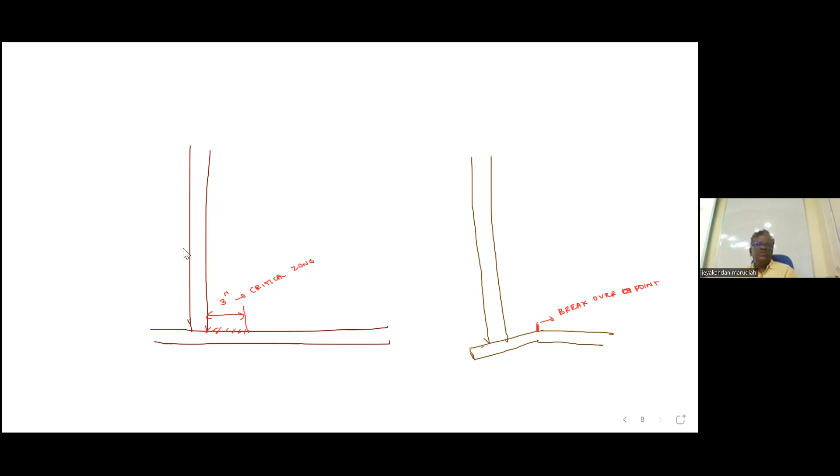Now we will go to the next one. Breakover point - closed book question, very important: the area of the tank bottom where settlement began. Highlight this one. Candidate tank: the tank for which corrosion rates are unknown. That is a kind of closed book question.

And this is a recently asked closed book question: what is meant by change in service? A change from previous operating conditions involving different properties of the stored product, such as specific gravity or corrosivity, or different service conditions of temperature and pressure. That is called change in service.

That is also a closed book question. Then, control tank: the tank for which corrosion rate and service history are known and documented. Then critical zone: the portion of the tank bottom or annular plate within 3 inches of the inside edge of the shell, measured radially inward. This terminology we have to understand - very, very important.

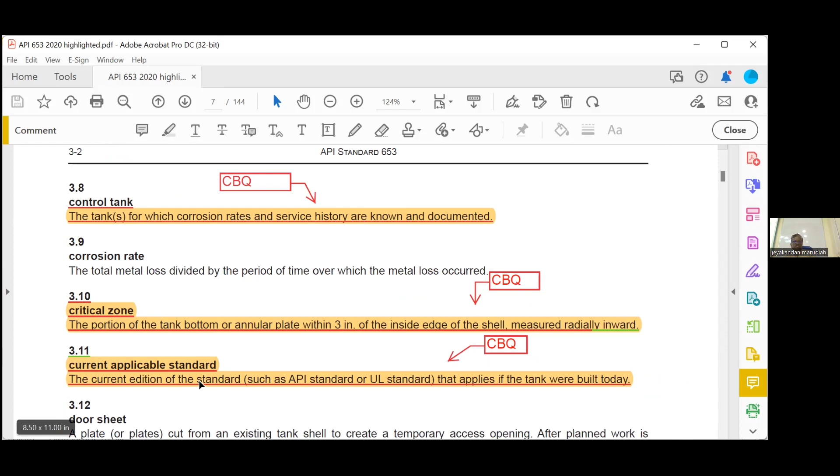Current applicable: the current edition of the standard that applies to tanks built today. That is also a closed book question. Then, who is the examiner? The examiner means the NDT technician. What is his responsibility? What is the responsibility of the NDT technician? Who is responsible for NDE? It is the authorized inspector, not the examiner.

Authorized inspector, that is API 653 inspector, is responsible for the NDE. So as per code, it's not NDT, it is NDE.

What is the responsibility of the examiner? When the authorized inspector asks to do the NDT, he has to do it and interpret as per the acceptance criteria. Acceptance criteria, we have to follow section 8, and 650 also says we have to follow section 8. He will write a report of accept or reject, but he will not evaluate as per 653.

What is the meaning of as per 653? He will tell there is a crack, we have to repair, but he will not decide whether it should be repaired today or at the next shutdown. That decision will be taken only by the API inspector. He will evaluate results as per the acceptance criteria and write accept or reject, that's all. He will not tell us to do the repair immediately, by tomorrow, or at the next shutdown - that will be done only by the inspector, unless the owner approves.

A person who assists the inspector by performing specific non-destructive examination on above ground storage tanks and evaluates to the applicable acceptance criteria, but does not interpret the results of examination according to 653, unless specifically trained and authorized to do so by the owner operator.

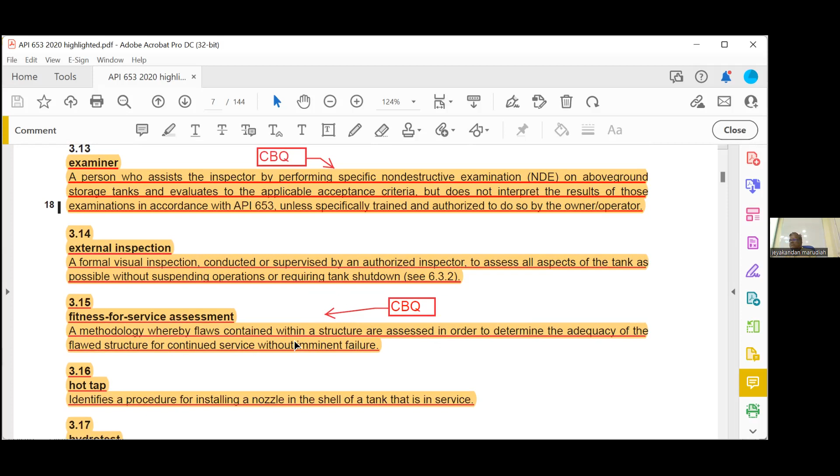Hot tap: identify the procedure for installing a nozzle in the shell of a tank that is in service - only shell nozzle. Then insert plate - we know what an insert plate is. When an insert plate is equal to the full height of the shell, it is considered as a shell plate. That is important, open to question.

Then internal inspection - a formal complete inspection, supervised by the authorized inspector, for all aspects of the internal tank. Then major alteration and major repair are clubbed together. If you take this, only installing a new bottom is an alteration - all others are major repair.

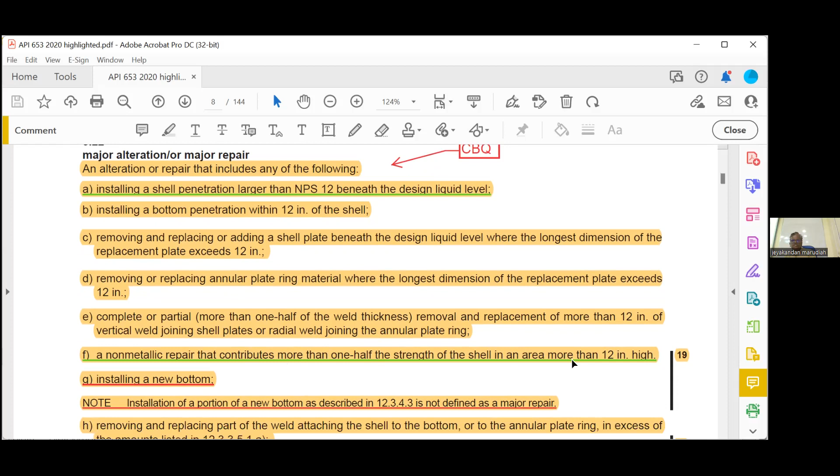Then product side - you know what is product side? Inside is called the product side, underside is called the soil side. The side of the tank that is in contact with the stored liquid.

Now, what is meant by recognized toughness? Just one minute, I am coming.

What is meant by recognized toughness? How do I know an in-service tank will not fail by brittle fracture? Brittle fracture's opposite is toughness. So if you know the toughness, then you can say it will not fail by brittle fracture - brittle is the exact opposite of toughness.

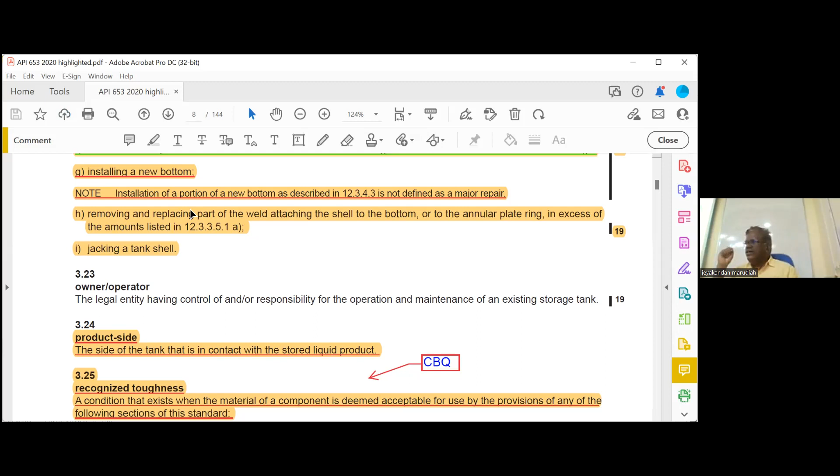How can I confirm a tank that has been in service for many years will not have brittle failure problems? If I know these 5 points, you can confirm it. First, a recognized condition that the material of the component is deemed accepted by use of provision of any of the following, section 5.3.2. Section 5.3 will state based on the edition of the tank.

Suppose you know which year the tank was constructed and you have a document that impact test was done on the tank, then you can say we already tested it, it will not fail. Or suppose you don't know whether impact testing was done, you have to cut the tank shell - based on the edition of the tank shell or by coupon testing. Coupon testing means you cut a piece from the shell plate and send it for impact test. If it passes impact test, no problem - it will withstand it and not have a brittle fracture problem.

Then, based on the thickness - what is based on the thickness? Generally, as per 653, any tank thickness less than half an inch - we are talking about the shell only, don't confuse it with others - any tank less than half an inch, up to 0 degree Fahrenheit, it will not fail.

Any tank less than half an inch thick will have no brittle fracture problem when operating above 0 degrees Fahrenheit. That is based on the thickness, then based on the design metal temperature.

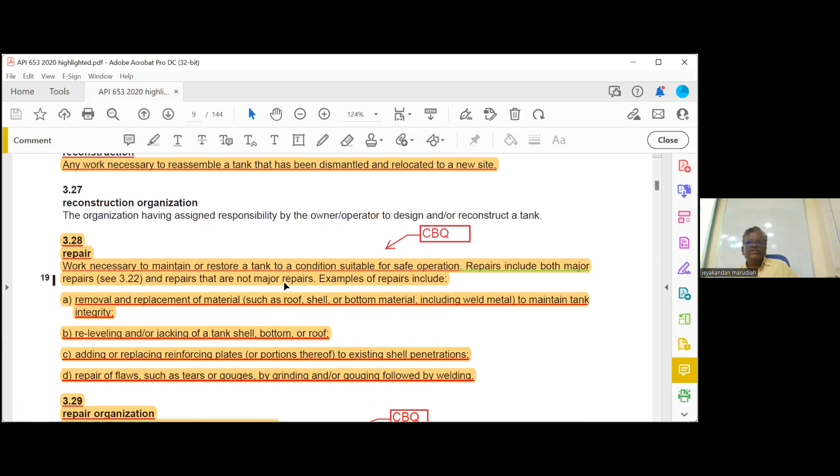Okay, then who can do the repair? The repair organization - who is physically doing the repair work? The contractor. First, the owner can have their own fabrication department do the repair, or a contractor can be approved by the owner, or a contractor approved by the jurisdiction - a government approved contractor.

Very simply, the organization meets any of the following: owner operator of above ground storage tanks who repairs or alters his own equipment; a contractor whose qualifications are acceptable to the owner operator of above ground storage tanks; or one who is authorized, acceptable, or otherwise not prohibited by the jurisdiction, who makes repairs according to standard. That is again a closed book question.

Then what is similar service? I already told you - it is the process by which a corrosion rate and inspection interval are established for a candidate tank using the corrosion rate and service history from a control tank, for the purpose of the next inspection. So control tank means we know the corrosion rate, candidate tank means we don't know the corrosion rate. So from the control tank we take it as a reference - instead of going inside the tank, we avoid the shutdown. That is the logic of this.

Then soil side - the side of the tank bottom that is in contact with the ground.

Then what is meant by unknown thickness insert plate? This we have not highlighted. We already highlighted in 650 the thickened insert plate - when the thickness is greater than 3mm. Unknown toughness: if you cannot prove the toughness by any method, then it is called unknown toughness. Recognized means you can prove confidently it will not fail brittly. Unknown means a condition where it cannot be demonstrated that the material of the component satisfies the definition of recognized. Highlight that also.

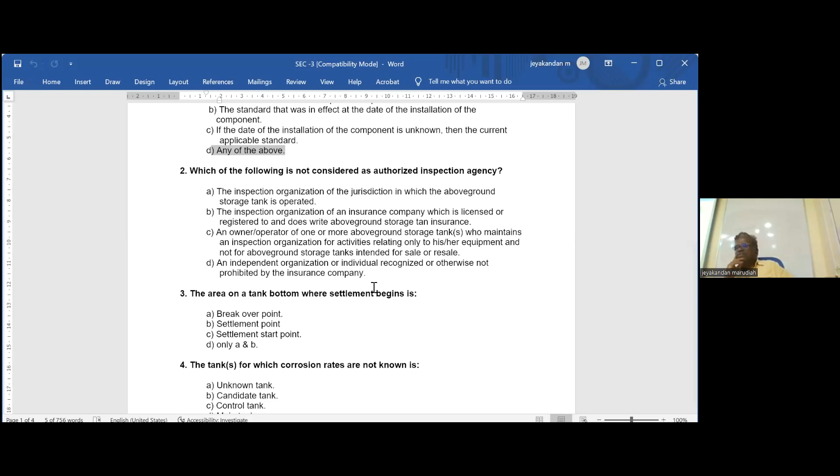The area on a tank bottom where settlement begins is called the definition of the breakover point.

Next, tanks for which corrosion rates are not known is called a candidate tank. Next, the tanks for which corrosion rate and service history are known and not known is a control tank.

Next, the current edition of the standard such as API standard or UL standard that applies if the tank... that is the current applicable standard.

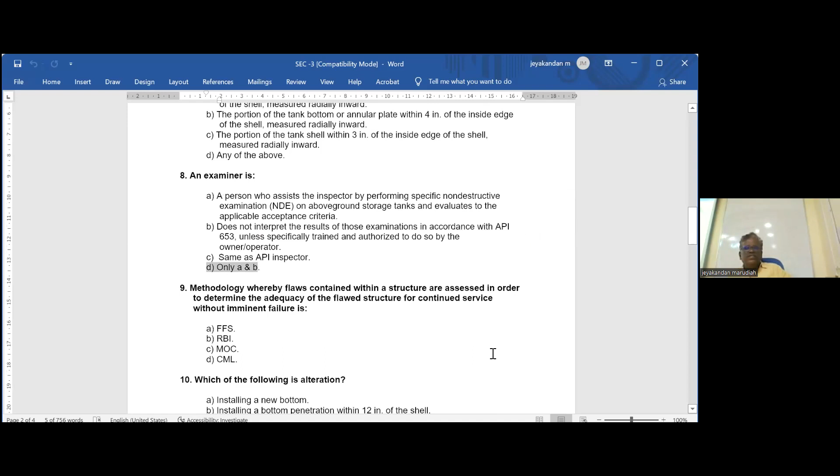Next, methodology whereby flaws contained within a structure are assessed in order to determine the adequacy of the flawed structure for continuous service without imminent failure - is fitness for service. Flaws are discontinuities detectable by NDT.

Next, which of the following is alteration? All of them. I told you only new bottom - we have to alter the tank.

Next, which of the following is considered as repair? All of the above - you can see just all of the above are considered as a repair.

Next, repair organization is an organization that meets which of the following? Any of the above. All are the definition of a repair organization.

Next, the process by which corrosion rates and inspection intervals are established for a candidate tank using corrosion rate and service history - that is a similar service assessment.

Next, a condition that exists when it cannot be demonstrated that the material of a component satisfies the toughness requirements - it is called unknown toughness.

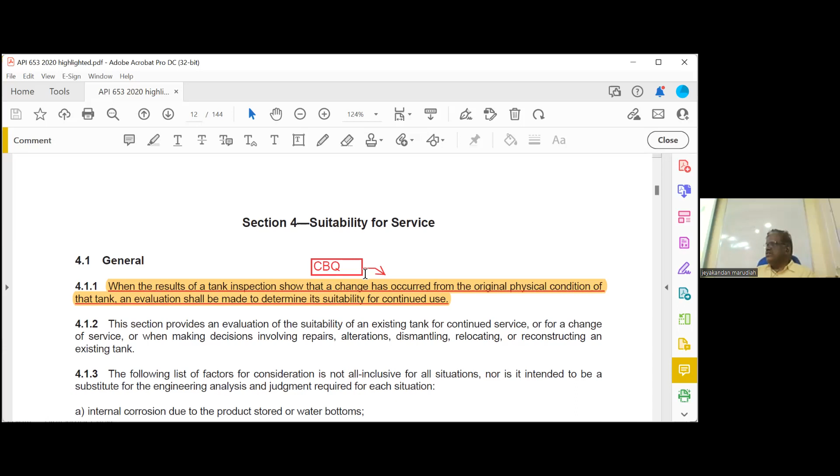Now, when we have to check whether the tank can continue in service or we have to make repairs: when the results of the tank inspection show that a change has occurred from the original physical condition - suppose we are inspecting a tank and find severe corrosion, then we have to check whether we can continue service. An evaluation shall be made to determine suitability for continuous service. That is important, a closed book question. When inspection shows there is deterioration or damage, then we have to evaluate it.

So if you see API 650, how is it organized? First in chapter 5 design, they start with the bottom, then annular plate, then shell, then finally roof. In 653, it's reverse for evaluation - we start from roof, then come to shell, then finally evaluation of the bottom. Okay, this is organized like this.

Now, what are the roof points we have to evaluate? There are 3-4 points I will say. When there is a severe corroded area, we have to mark a 100 square inch area by marker - that means 10 inch by 10 inch. How will you calculate area? Length into width, 10 by 10 is 100 square inch, and you have to average the thickness in that area.

You have to take thickness reading and average it. If the average thickness is less than 2.3 mm, that area should be repaired - point number 1. If the average is more than 2.3 mm, you can accept it. Even 2.3 is accepted. 2.3 means 0.09 inch.

So again, I will repeat condition number 1 for roof evaluation. Any 100 square inch area, if the average thickness is less than 0.09 inch, the area should be repaired. Repaired means you can make a weld build-up - it is allowed, weld build-up and grind. Or you can replace, cut and replace. That is about the roof.

Or you can put a patch plate. It means all the roof, wherever you are seeing the corroded area - it is not all the roof. We can see the physically corroded area. That's point number 1. Another one is columns.

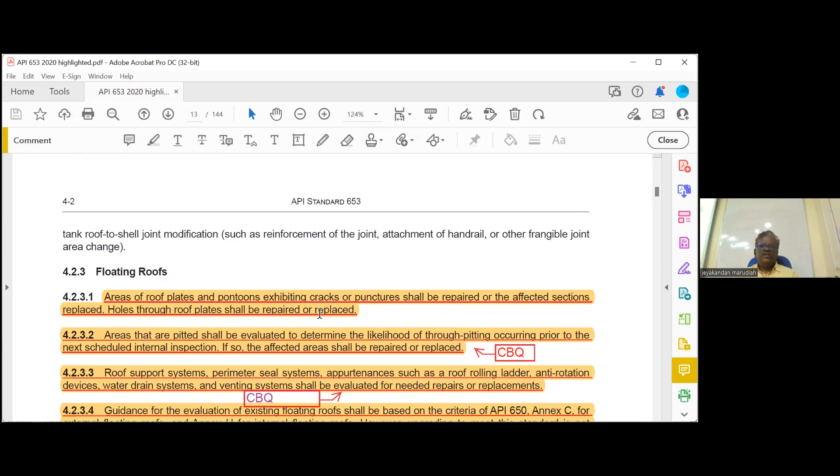That's not a very tricky thing. The next one is important: areas pitted shall be evaluated to determine the likelihood of through pitting occurring prior to the next schedule. Suppose there is pitting, we have to check whether it's only a small pitting or deep pitting. If deep pitting and you think before the next inspection it will become a hole, then we have to fill it. How will we repair the pitting? By welding. If so, affected area shall be repaired or replaced.

Then 4233, that's also important. Roof support systems, perimeter seal system, appurtenances such as roof rolling ladder, anti-rotation device, water drain, and venting shall be evaluated for needed repairs and replacement. Then guidance for evaluation of existing shall be based on 650 annexure C for external floating roof, annexure H for internal floating roof. However, upgrading to meet the standard is not mandatory. That is an open book question - you don't need to upgrade it.

Then external pressure - these are some sections given. If they ask open book, not very important. If applicable, the roof supporting structure and the roof to shell junction shall be evaluated for effects of a partial vacuum. The criteria annexure B is followed. Partial vacuum, you have to use annexure B, open book question.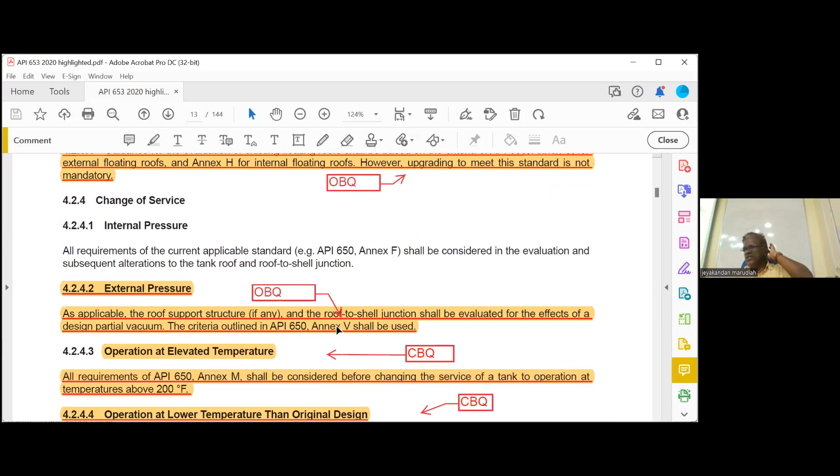Then it shall be considered before changing service at a temperature above 200. If it is operating above 200, annexure M we have to follow. That is also a closed book question, so annexure M you should know. Other annexures, no need. Then lower temperature.

If the operating temperature is changed to a lower temperature than the original design, the requirements of the current applicable standard for the lower temperature shall be met. That is - current applicable standard is a keyword here. So if it is going for lower temperature, you have to follow the latest edition. Current applicable standard only we have to follow. That is a keyword.

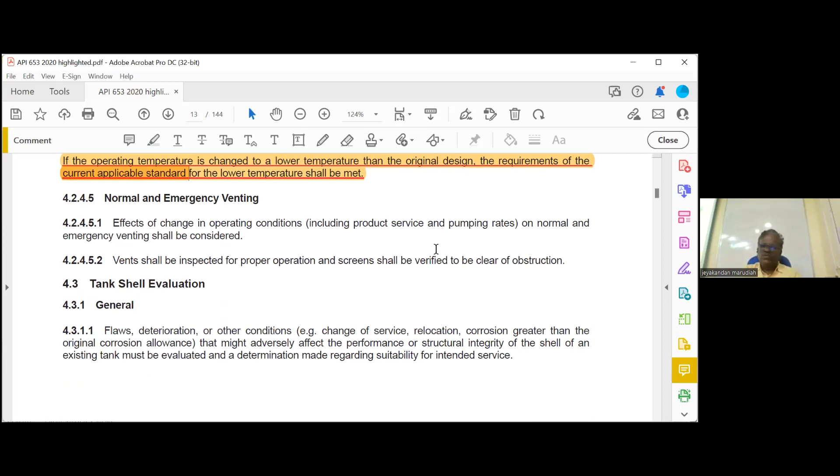Okay sir. Now we will go to the tank shell evaluation. It is a big chapter, but I will split into parts. First one, how to evaluate tank shell.

We will go very slowly, but if you don't understand, please ask. Now I have a tank. The shell evaluation, I am going for inspection.

So, first I am checking this. Just follow this, what I'm saying. We are checking the tank and there is a corroded area in the tank shell. You can visually see that. Then what you have to do is mark the corroded area.

This is the corroded area. I have here also the second shell course, also a corroded area. Now, what is the difference between the corroded area in shell number 1 and shell number 2? By seeing this, what I'm drawing, what is the difference?

So this is near the weld, this is away from the weld. So for away from the weld, for calculation, we have to take E is equal to 1. If it is near the weld, E is not 1, it can be less than or equal to 1.

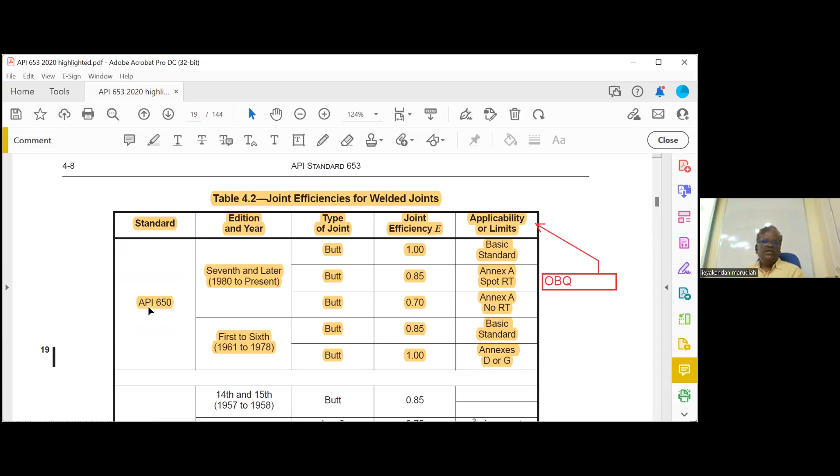You see, if it is constructed - I told there are two codes, one is API 650, another is API 12C. If the tank is constructed from 1980 to present, the butt weld efficiency is 1, basic standard. Basic means 650 main code. But if it has Annexure A, then 0.85.

Annexure A without RT is 0.7. We have seen Annexure A also, how it was constructed. Basic standard means API 650, it was constructed as per 650 main code, efficiency is 1. That's why in the 650 main code formula there is no efficiency because E is equal to 1. But for Annexure A, if you are taking radiography 0.85, no radiography 0.7.

But if it was constructed 1961 to 78, then Annexure A no RT is 0.7, basic standard is 0.85. At that time Annexure DG also existed, then it will be 1.

Then if it was constructed up to API 12C, there is a big list. This was asked in the last exam - unknown material, but told what standard or year it was constructed. But if you have a butt joint, we have to take 0.7. That is important, highlight it as open book.

Suppose you don't know which year it was constructed, which standard it was constructed, then for a butt joint we have to take this table regularly. They are asking open book, how to find out the efficiency. Please remember, sometimes they will confuse you.

So suppose I am asking a question: a tank was constructed, say in 1995, with Annexure A with no RT, and the corroded area is 1 feet away from the bottom joint. What is the joint efficiency?

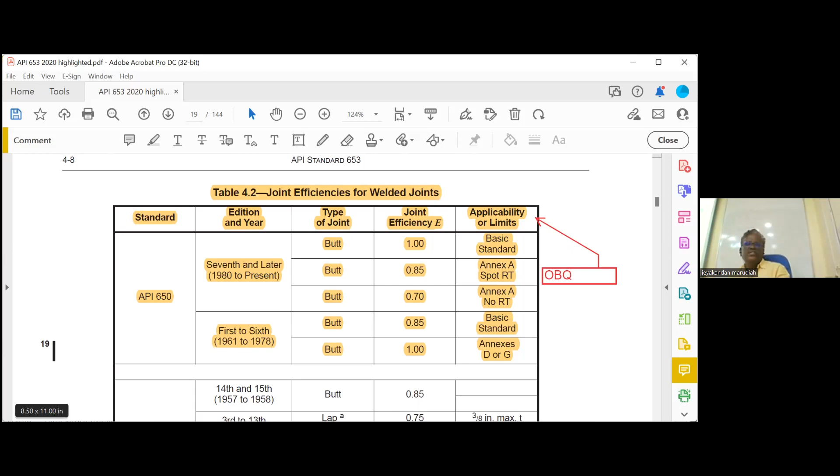Two types of shell thickness. Suppose thickness is T. For example, your shell thickness is 2 inch. What does code say? 1 inch or 2T, whichever is greater. Suppose shell thickness is 2 inch, 2T, how much will it come? 4 inch. Only if it is 4 inch away, then we take E1. If it is less than 4 inch, we have to follow the table.

Now you know how to find out the efficiency. Efficiency is regularly asked in the exam, and that will be an open book question. I will repeat: any corroded area near the weld, we have to take E from the table. Suppose you don't know which year it was constructed - there is unknown also there, but joint, lap joint, everything they have given.

Just read it carefully and answer it. If it is away from the weld, it doesn't matter which year it was built - efficiency is always 1. What is meant by away from the weld? The corroded area from the weld should be at least 1 inch or 2 times thickness, whichever is greater, we have to consider. First one is clear.

Now we will take only one area for evaluation. Next, I have to check by random thickness measurement - I will do the UT, and whichever is the lower thickness, I will get some lower thickness.

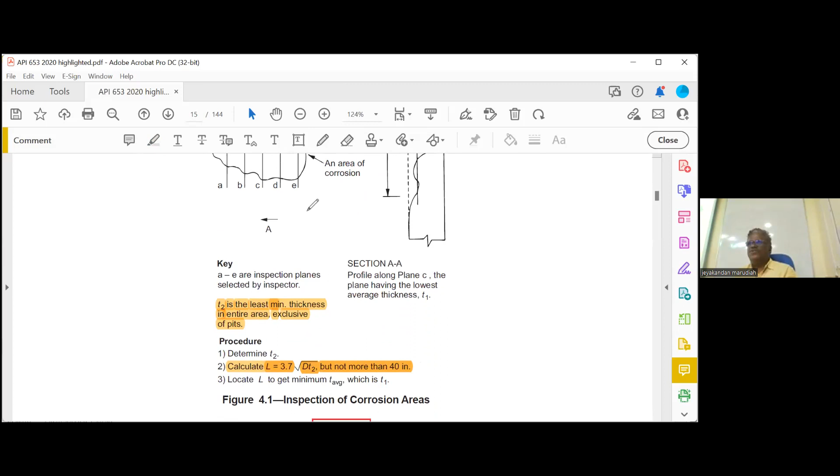Now we have calculated the critical length as 24 point something. What is the purpose of this? You have to measure the corroded area height. For example, my corroded area height is coming to say 45 inch. But I have to make maximum 24 only. This is the maximum area I can make for thickness averaging.

So what is meant by critical length? This is the length you can have for thickness averaging. You cannot average the entire height. So maximum thickness averaging allowed is only within the critical length.

How much have you calculated the critical length? 24.8. But here, for example, 45-inch total height of the corroded area. Then you have to make it into two areas. So 45 divided by 2 will come to 22.5. So I will make it, say, 23. This area 23 inch, this area 23.

Suppose this corroded area is only 20 inch. Then I can make the entire area for thickness averaging. So this critical length tells how much area you can average the thickness. If it is more, within the 23 inches we have to take reading and average it.

So this will be a separate area A, and this will be a separate area B. Here the height is only 20 inch, so we have only one area, there is no A/B. I'm just writing this for your understanding. Is it clear now? So here I have only one area to average, but here you have two areas. Now how will we average the thickness?

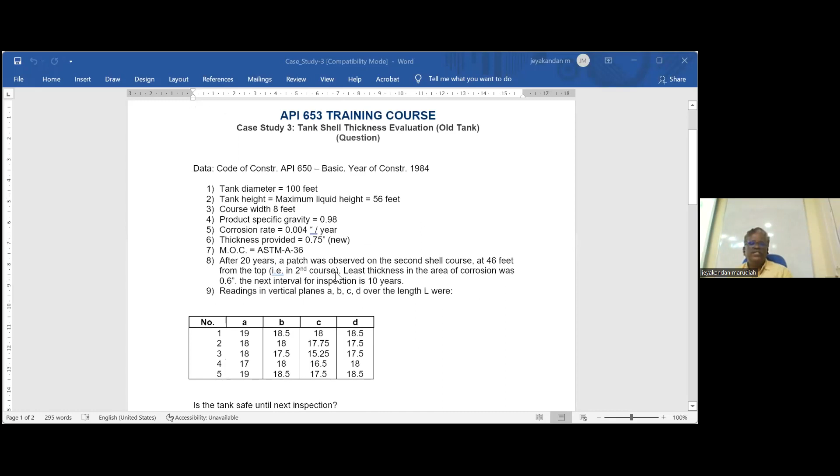We have actually readings in the vertical plane A, B, C, D. So we have taken only 4 readings. Okay, no problem, generally what should be the minimum number of lines? 5. Okay, no problem. So you have to take readings in vertical planes A, B, C, D over the length L.

So, okay, now if this is given in millimeter actually, okay no problem. What is T2 here from the reading? What is T2? What does T2 mean? 15.25, the minimum reading in your area. So they have given the readings, which is the minimum reading in this?

15.25 is the minimum. 15.25 is the T2. So now I will convert it into inches. How do we convert mm to inches? Yeah, it is mm, given in mm. Okay, 15.25 divided by 25.4, this is 0.6 inch. Write this in your notebook, because we will do the calculation in the afternoon. T2 is 0.6 inch.

Okay, now what is T1? What I told you, T1, we have to average it. So average it now, yeah, average it. I have given you 4 sets of readings. You have to average A, B, C, D, and whichever is the lowest average, that is T1. Again you average it in millimeter, then convert into - finally you can convert into inches.

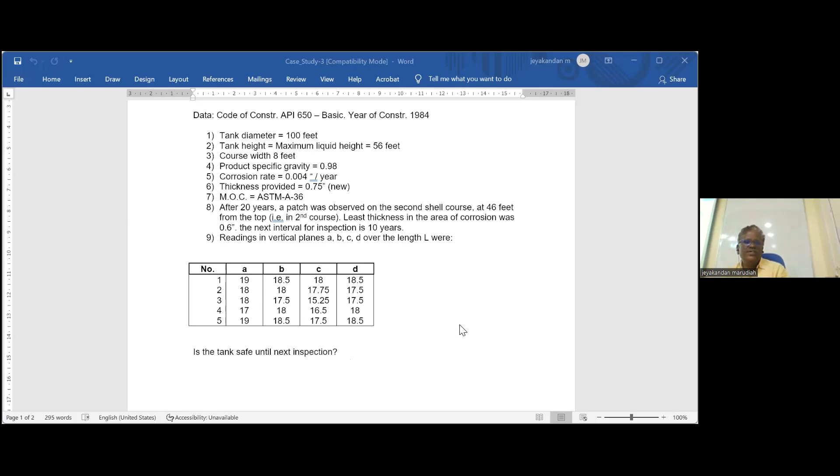Now where is it given? Let us go to the code book, because I told you we'll go part by part in the code. Now start from here. So actual thickness determination, please take 4.3.2 in the code book. For determining the controlling thickness of each shell course, when there are corroded areas of considerable size, measured thickness shall be averaged in accordance with the following procedure.

Highlight that one: A, for each area, the authorized inspector shall determine the minimum thickness T2 at any point in the corroded area, excluding the scattered pits. Pits you should not consider.

Okay, next, calculate the critical length L. L is equal to 3.7 times the square root of D times T2, but not more than 40 inch. This we already completed, that is a closed book question. L is the maximum vertical length in inches over which hoop stresses are assumed to average out. The actual length may exceed L.

I told you in our case, it is more than that. D is the tank diameter in feet. T2 is the least thickness in inches in the area of corrosion exclusive of pits.

Now, the authorized inspector shall visually or otherwise decide which vertical plane in the area is likely to be most affected. Profile measurement shall be taken along each vertical plane for a distance L to determine the lowest average thickness T1. Lowest average thickness T1, averaged over length L using at least 5 equally spaced measurements over length L. So we have to take at least 5 measurements, I told you, 5 lengths.

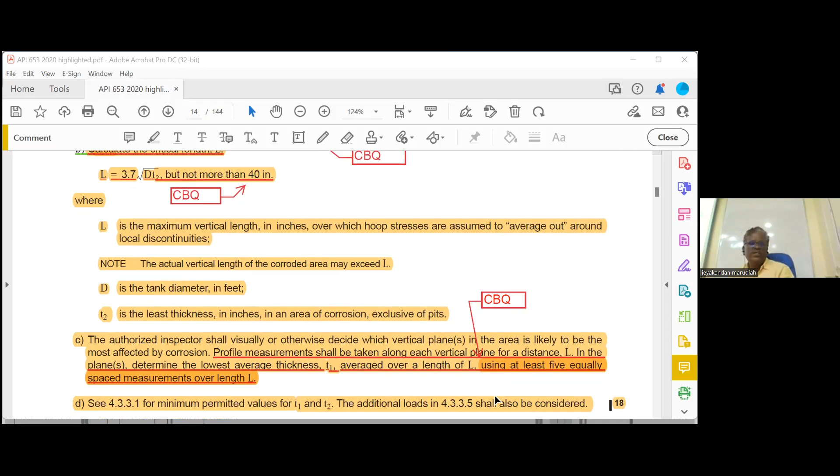Then, so we know now T1 and T2. Now we have to calculate what is the T required in that area by using the one-foot formula. But we will not go back to 650. Here the formula is given. See, here there are 2 formulas.

You can see here, section 4.3.3.1, page 4-5. The minimum acceptable thickness, we have to find it out. The minimum acceptable thickness for continued service shall be determined by one or more methods. These methods are limited to tank diameter equal to or less than 200 feet. When determining the minimum acceptable thickness for the entire shell course...

When it is corroding away from the weld, we will not use minus 1. When you are measuring the entire thickness of the course, we will use H. There are ways to know whether it is an entire-course question, it will be clearly mentioned. So you can see 2 formulas.

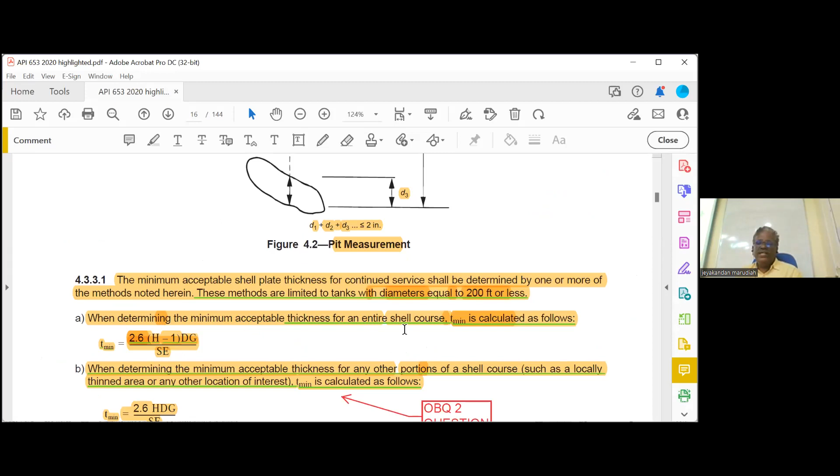For determining the minimum acceptable thickness of the entire shell course, T minimum is calculated as 2.6 times (H minus 1) times D times G divided by SE, if they are asking for the entire shell course. Entire shell course, what is the minimum thickness? H minus 1. Only for a locally corroded area, we use H. When determining the minimum acceptable thickness for any other portion of the shell course, such as a locally thinned area, the formula is 2.6 H D G SE.

Now you know H. What is H? Design liquid level from the corroded area. But for the entire shell course we will take from the joint. You can see the H definition: height from the bottom of the shell course under consideration to the maximum liquid level, when evaluating the entire shell course. Suppose the entire shell course is corroded, then we will say from the bottom joint.

So at this point only we will take L, the locally thinned area. This is a locally thinned area only I mark. Suppose the entire shell course you want to calculate, you have to use H minus 1. Away from the weld, we have to do it. H minus 1 we will not use there. If the question asks for the entire shell course, use H minus 1. If they ask for the locally thinned area, we will use H.

What is H? From the corroded area bottom to the design liquid level, that is how they calculate it. For example, the tank is say 50 feet height, design liquid level. Now it is corroding say 3 feet from the bottom. Then what is the design liquid level? We will say 50 minus 3, equals 47 from here. We have to take it like this.

Okay. Sir, sir, yes. Sir, sorry sir, for the given example...

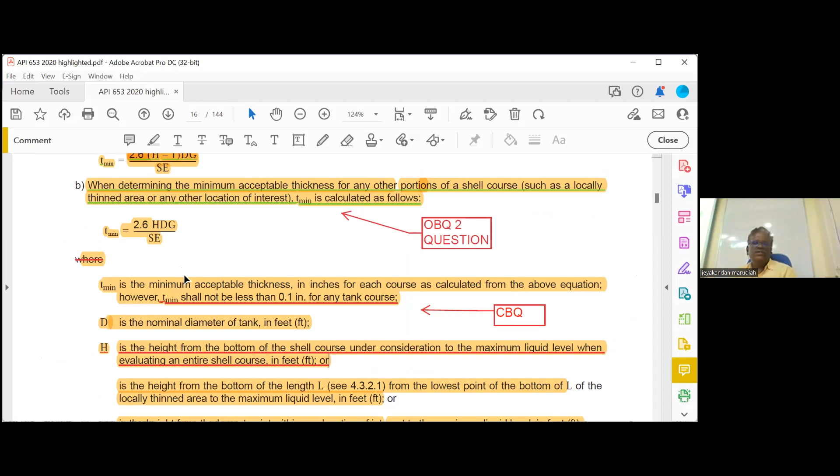Should I use H1, or H minus 1 formula? If the question asks what is the minimum thickness required for the entire shell course, use the H minus 1 formula. Please remember, they will not combine everything into the same question. The question will be separate. They will ask either T2 as one question, T1 as another question, L as another question, T minimum as another question. They will not club everything together.

So if they are asking T minimum for the entire shell course, use H minus 1. If they are asking about a locally thinned area, you have to use H, no minus 1. Is it clear? You have to read the question carefully.

So for the given example, we should use only the H formula, is that right? H only we have to use because it is a local area only that we marked. Yes sir. Okay, now you know D, diameter.

You know what G is, specific gravity. Now E, I already explained how to calculate. Now how to take the stress. Again, for stress we will not follow the 650 table. There is a separate stress table given here. We have to follow that one.

Please go to page number 4-7. Now this is the stress table. Allowable product stress we have to follow. Again, there are two different stresses: lower two courses, meaning the first and second course, we have to follow this value. From the upper course, you have to follow this column.

Now if you don't know the material, unknown, we have to follow this value. Suppose you don't know the material, we have to follow this. Highlight this, so that is for the open book question. Suppose you don't know the tank, because it's an in-service tank and unknown, you have to follow this one.

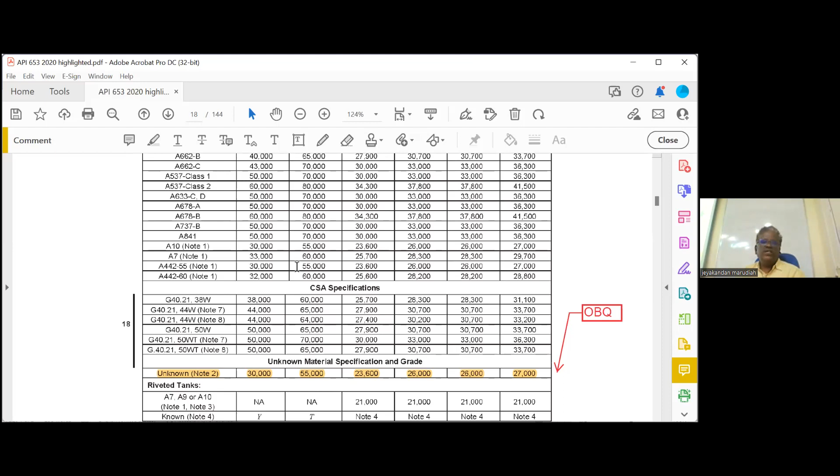Yeah, suppose the entire shell is corroded, then you have to use the H minus 1 formula. If you only have a locally thinned area corroded, like this or here, then we will use the H formula. How do I know it's a locally thinned area? It will be mentioned in the question. The question asks, what is the T minimum when the entire shell course is corroded? We have to use H minus 1.

If they are asking about a locally thinned area in the second shell course or first shell course, there we should not use H minus 1. We will use H only. Okay.

Up to 40 inches, if the critical length is up to 40 inches, we will take the actual value like 20 or 25. But if this critical length is crossing 40 inches, we have to take only 40 as the reading. That's all - 40 is the maximum critical length allowed by the 653 code.